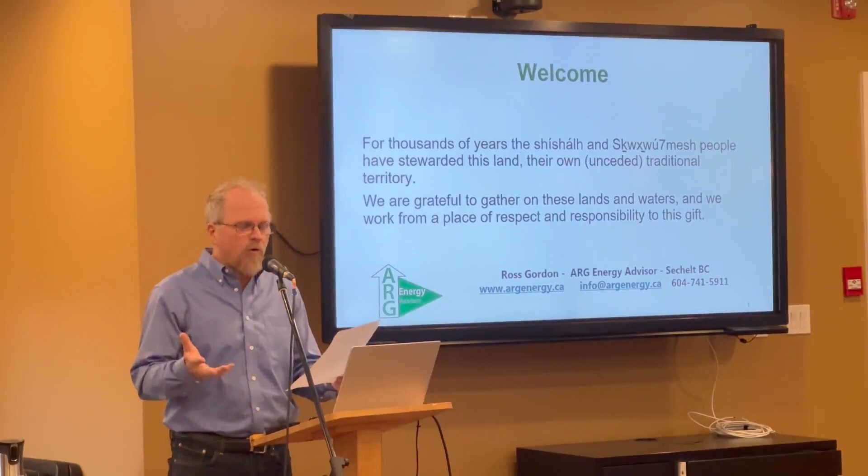Then we've got Jerry Pajot, and he is an expert on home energy efficiency and a board member of the Sunshine Coast Community Solar Energy Association. So another great resource. And finally, Liam Bonsar, who was the installer for our solar panels. He is the owner and master and Red Seal electrician with Newbon Canada, and he's going to finish off.

So we're going to cover a wide range of issues on what you can do from an energy perspective, how you can evaluate what to do first, what the steps are to be taken, and then a little bit more roll up your sleeves - how do we actually get this done? What does it look like when it's into your home? So I'm going to pass it over now to Dr. Ross Gordon. Thank you very much.

Of course, it's important to just take a moment to appreciate the opportunity we have to be here on this land.

Good evening. I'm really excited to contribute to this climate action series. I live in Sechelt, and I work on the coast as a Natural Resources Canada licensed energy advisor, working with residential homes. In a parallel universe, I have academic credentials in environmental anthropology, and I've taught courses at UBCO like political ecology, living in the Anthropocene, culture and nature, and these sorts of things.

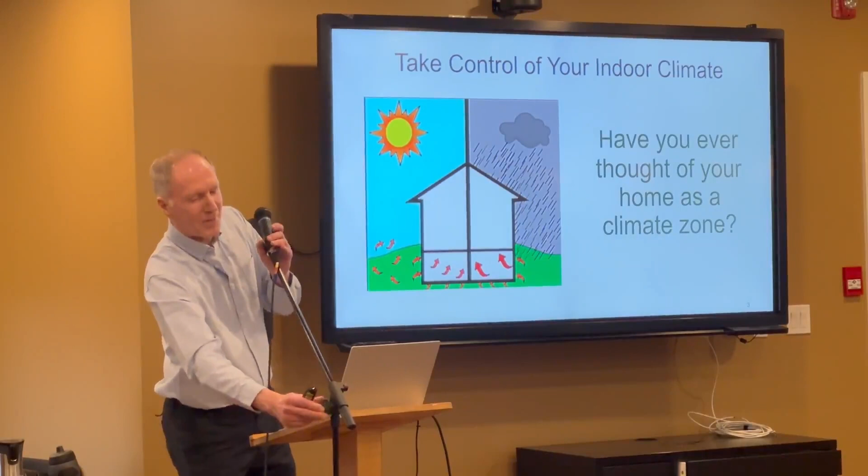So I'm going to run through, it's about 12 or 13 minutes, a bit of a talk, and then there's lots of time for questions, because I'd like to keep the flow happening, and then we'll come back. So if you just hold your questions to the end, happy to engage.

So homes are being made much more airtight for energy efficiency, and as mentioned, more than ever, our homes are sanctuaries from changing climate outside.

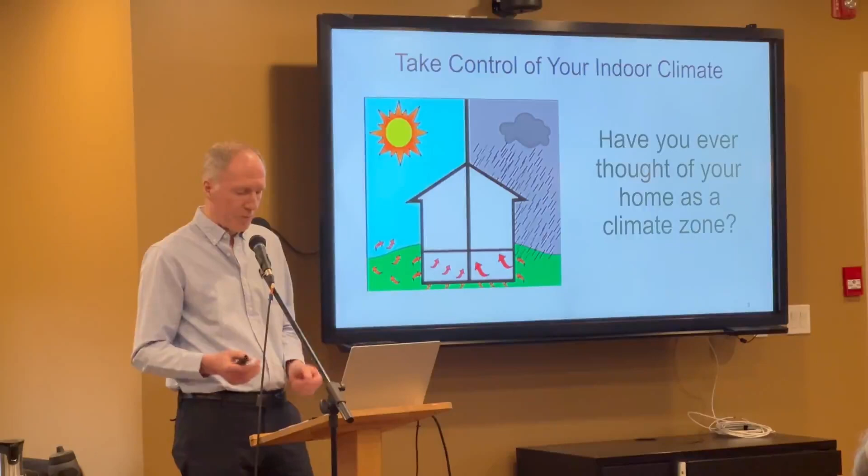Let's start off by thinking about the distinction between how we feel in our homes and how we feel about our home. How do we feel in our home relates to the building technologies. This is a really important distinction, because when you're trying to make decisions about upgrading, there are so many different pieces to those decisions, and I think it's really helpful to distinguish between how we feel about the home and how we feel in it.

We'll drill into this a little bit more as we go along, because this really relates to experiences, and everybody has some different ideas about that. So just for fun, if you share a home with someone who has different ideas than you do about what home comfort means, raise your hand please.

You're bad. Now, please, I did anticipate that. Please raise your hand if you kept it down last time because you did not want to start a fight over home comfort beliefs. So I think it makes the point.

There's two different sets of ideas we need to think about. One is how we feel about it and how everybody else in the home feels about it, and how the home actually functions. So the point here isn't to start fights, but to help you isolate the technology questions from the experience questions for the purpose of planning.

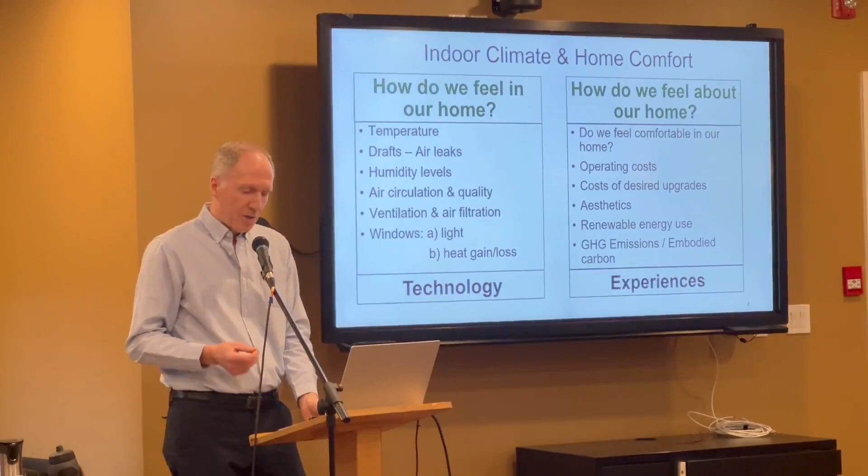That way we can start to not get overwhelmed and start to make a plan to choose the technologies to improve the energy efficiency of your home, save money, and improve home comfort.

The energy plan for a new or existing home is based on building an energy model of the home's exterior envelope, the mechanical equipment for heating and cooling, and ventilation. This is actually what I do as an energy advisor, is break all those things apart. So let's start with some of the basics of energy modeling.

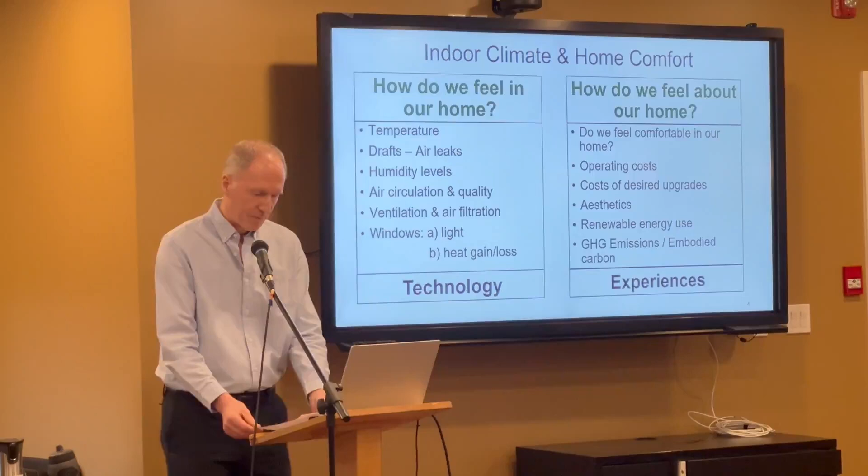So just a little bit of physics, we'll keep it light. When we start to model a home, we're evaluating all the components of the home associated with energy use and flow. Heat gain and heat loss is a lot more complicated in a home than most people realize, because there are three different mechanisms of heat flow in buildings, always in play in many different ways. They are conduction or heat transfer, convection or movement of air, and radiation of heat from the sun or a mechanical heat source.

In energy modeling and planning, we must isolate the technological processes from our experiences of them. So just for fun, reach down to maybe the little bar on your chair and feel the metal, and just feel how warm or cold that is. Now take the same hand, if you don't mind, and just reach down and touch the wood on the floor.

What's the difference in temperature? Did one feel colder than the other? The floor's warmer. Is the floor really warmer? Or do we feel differently because we don't feel temperature? We feel change in temperature.

So the metal conducts the heat away from our body very quickly, because metal conducts heat faster than the wood does. So there actually isn't a real difference, it's simple but it's complicated because we think of feeling temperature, but we're actually feeling temperature change when we notice temperature.

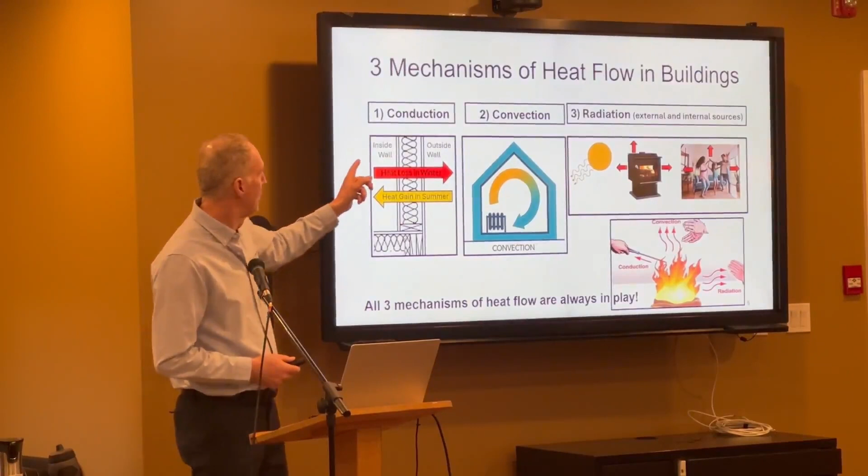Okay, so that's basically the hard physics lecture for tonight. But just remember those three: conduction, convection, radiation. All of those three elements are in play in every house, and every component of the house envelope, the walls, the ceilings, the floors, these things are going on to some degree or another with most of the different components. That's why it's important to think of a house as a system, because there are many different components that interact and are doing different things at different times.

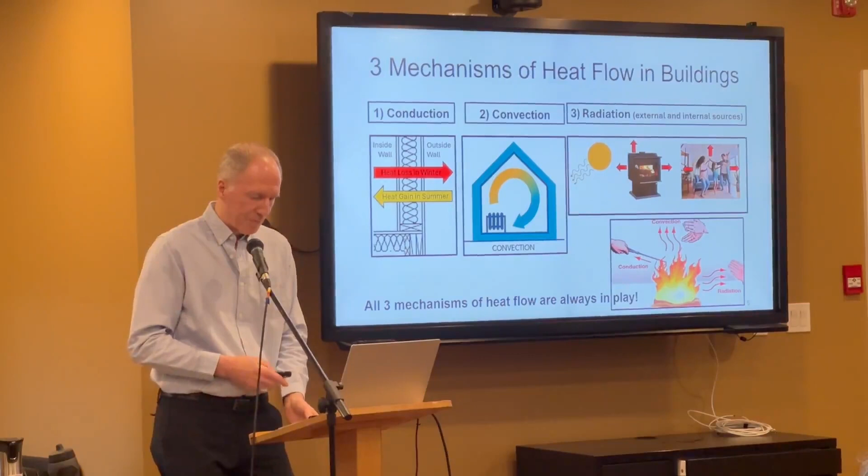So for heat conduction alone, each element of your house performs differently. When I actually do an energy evaluation, I'm estimating the current total heat gain and loss performance of each house element and interactions with other elements. Then we can start to identify the potential performance of possible upgrades.

There are technology change projections. These projections help produce upgrade estimates. The idea being, if we figure out what each element is doing in terms of heat gain or heat loss, depending on the season, and we think about changing one thing, we can start to understand how it's affecting other things.

It's a system. A lot of times people come to me and say, I want to get this, or I want to do that. And my first step is always to say, okay, let's get a plan here and think about what the priorities are and how each change is going to affect other changes. That's why the planning is important.

So the goal is to be able to compare the technology performance upgrades then with the home comfort benefits and cost estimates to make a plan. So breaking out the technologies and then thinking about how you want to feel in your home helps us make good decisions.

So indoor climate control goes beyond home comfort too. It's also a health issue. Many of us spend up to 18 hours a day in our homes, and as we make our homes more energy efficient, the interior living spaces become more discrete and unique to the home's location, structure, and mechanical systems.

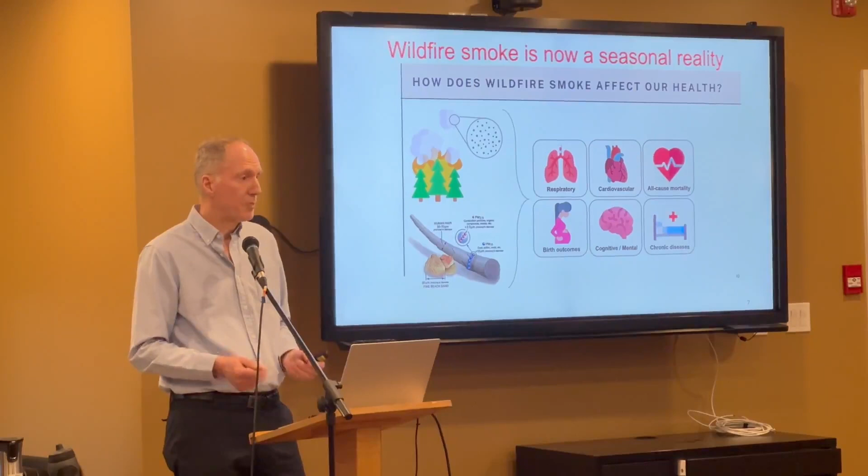So why are modern homes indoor climate zones now? As I mentioned, this is really a relatively recent change. When people heated with open fireplaces or coal furnaces, homes were drafty buildings with air leaks everywhere. Combustion heat warmed up the airspace near a flame, but sent most of the heat up the chimney.

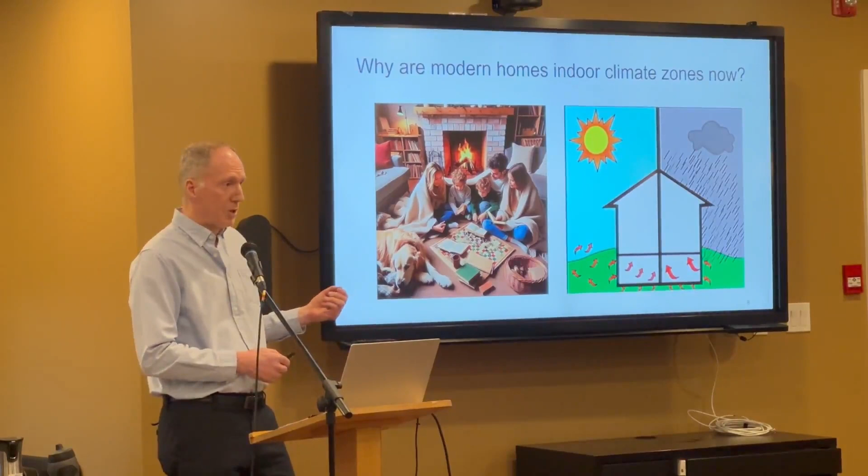Replacement cold air entered through cracks and holes in the building. This is what's called an exhaust-only ventilation system, and not very efficient, given the amount of wasted heat up the chimney, and not very comfortable near the walls where cold air is entering. So for cooling, in that system, you just open the windows, which doesn't always work now.

A more recent house design uses just kitchen and bathroom fans for ventilation. So in many of our houses, the only exhaust of air out of the house is when you actually physically turn a fan on, meaning a kitchen or bathroom fan.

So that's still an exhaust-only system, because the weakness of it is that in heating season, doing that is sending warm air out of the house and still drawing cold air replacement to come in through the cracks. This exhaust-only air movement creates what's called negative pressure in the home, drawing other air in from outside. So exhaust-only systems also assume a clean outside air supply.

The exhaust also may not remove all the fuel-burning residues, particulates, and gases that are made in the home from cooking or coming off other substances.

So over the years, as gas or electric furnaces and baseboard heating replaced coal and wood devices for home space heating, smaller percentages of unused heat were wasted, less air was drawn into the home, reducing drafts and improving air distribution. Our expectations of home comfort have come up as well.

So the house envelope is an important term you'll hear a lot tonight. Basically that's the defined separation between the indoor and outdoor climate, all the components of the home that form those barriers. So ceilings, walls, foundations, etc.

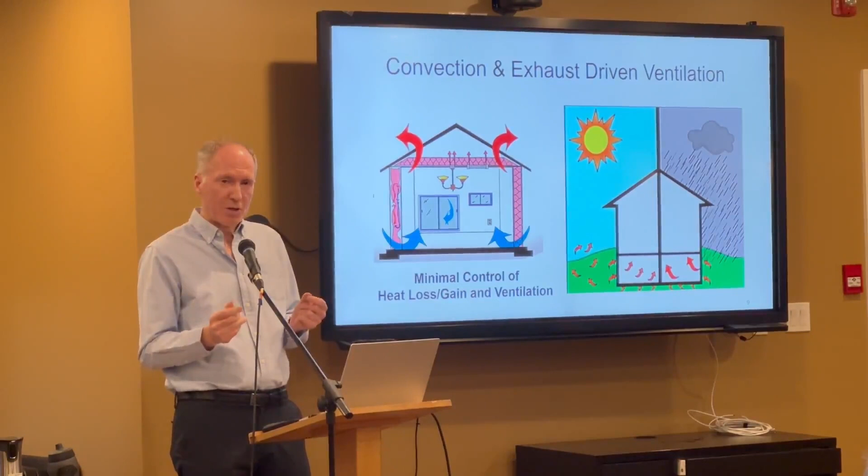When you're building a house, we're going to hear from an expert builder on making energy efficient homes, and I'm sure Brad's going to be talking to you about the seams of the house, how you stitch the windows to the walls and the roof to the walls, all these elements. This is often where the air leaks happen, and we'll talk more about that. So good connections are critical to resist the incoming air.

Now, another important idea I want to present tonight, because it tends to be a little confusing for people not familiar with it. Today, by building code in BC, and it's a recent change, the house envelope in new build homes is required to include a balanced mechanical ventilation system, often known as an HRV or ERV, heat recovery ventilator or energy recovery ventilator.

What this is, is a box with a lot of little metal tubes that cross over each other, and there's 4 pipes. One pipe draws air in from outside with a fan that doesn't use much electricity, pushes it through tiny metal tubes—metal conducts, as we talked about earlier—and then moves it into the house. The outgoing air, which is warm in heating season, crosses the path of the incoming air, so you get about a 75% recovery rate with the air change system.

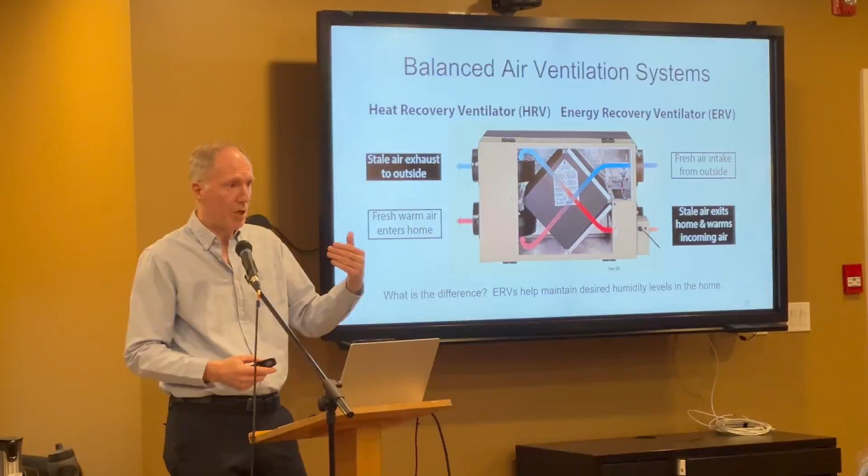So you get fresh air in the house and stale air being exhausted all the time on a steady state. This is where new homes are required to have this, and it changes from an exhaust-only system to an actual managed ventilation system, because it's ongoing. The key difference between the terms ERV and HRV is that ERVs adjust for humidity as well, to help balance that out on the way in and out.

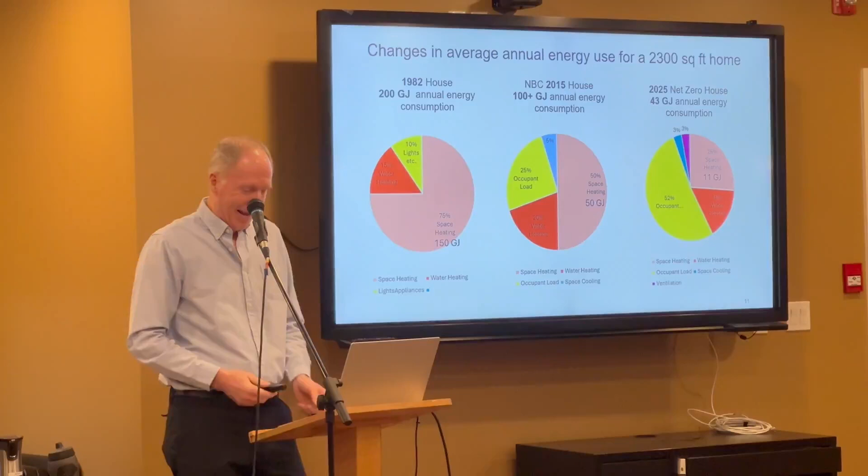Modern homes use a lot less energy for space heating by using more efficient heating systems such as heat pumps. In contrast, the occupant load has now become a much higher concentration of the percentage of energy used—think of all the devices we have now compared to 40 years ago. But the focus here is just to show that heat loss decreases with more energy efficient construction methods, and that reduces random airflow through the envelope.

Air leak testing—I'm going to speak to a little bit here, and I think Brad's going to pick up on it in a few minutes as well.

When I do a home evaluation, whether it's for a new home to test it or for a home being evaluated for efficiency, I do something called an air tightness test, where I put a fan on the door and it draws air out of the house, speeding up the depressurization process to simulate a 30-kilometer wind hitting the house from every direction.

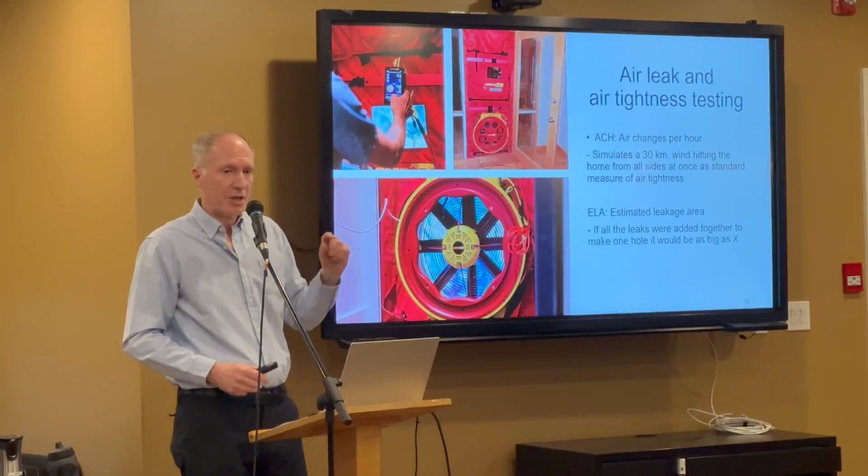This is a standardized testing system nationwide, and homes are rated to a certain amount of air changes per hour, which is basically the speed of replacement as air is drawn out of the house, and also the estimated leakage area—meaning if you take all the cracks and holes in the house and put them into one thing, is it a basketball, a yoga ball, or a baseball? Those are two terms that you'll see.

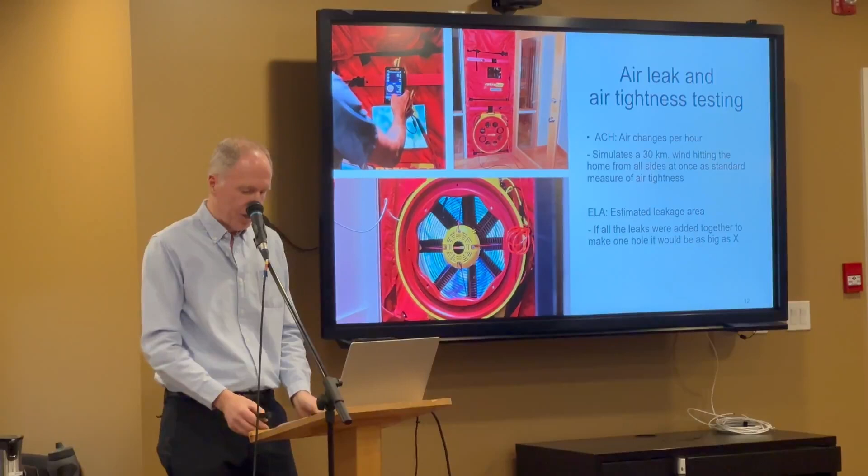There's a standard grade. The actual internal air volume of the house has to be calculated as well, to factor in air temperature differences inside and out. There's a few other factors that go in.

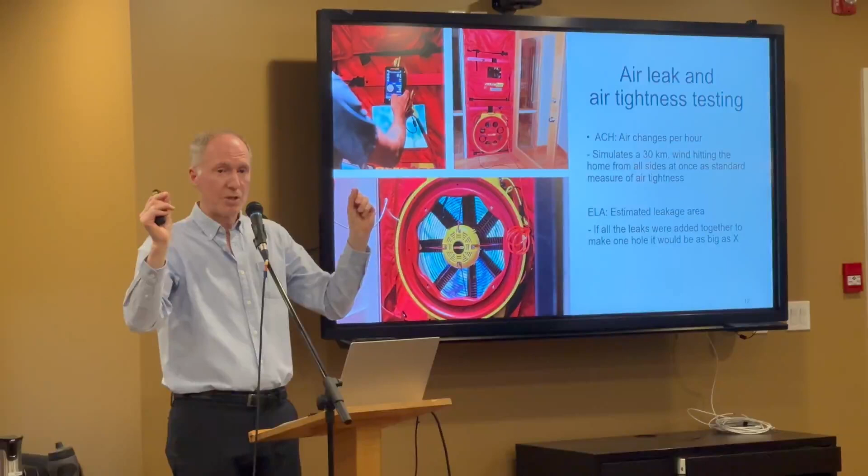So again, this is part of the idea of a house as a system, because now we're measuring the effectiveness of all the different elements of the house envelope combined, and also how well they've been stitched together—how well the actual construction process went, and how many little gaps were left behind through construction techniques.

Okay, so we control our indoor climate by making decisions about the system components we choose, how we use them, and how each component affects other components. For example, if we increase insulation levels or fix air leaks, then we can buy a smaller heat pump that will reduce energy costs and be more efficient. Everything's interconnected. So once we see that a home is a system, the plan allows us to anticipate outcomes when we make changes to the system.

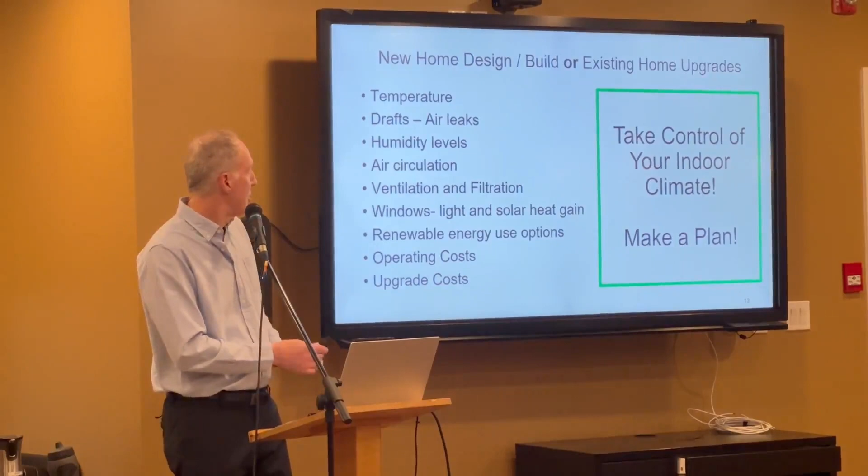When I work as an energy advisor, I evaluate existing homes to determine current energy model system components and then provide planning options for different combinations. This is the path to make good decisions to design and control the home's indoor climate. So here I'm stressing the technology aspects, to come back to the first slide, and then pairing that with what your idea of home comfort is and what your goals are, and then you can start to put those pieces together.

I also work with new home builders to design homes right from the plans. We build an energy model from the plans and the projections of what kind of mechanical systems are going to go in to meet current building codes. In BC, there's something called STEP code, a standardized level that's gradually being advanced every few years, requiring houses to be built to a certain degree of energy efficiency. So that has to start right at the design stage to achieve.

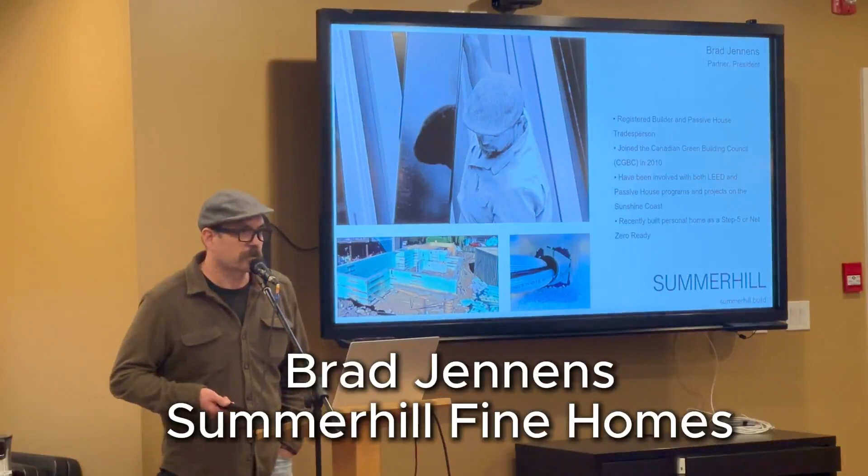Thanks, Ross, for leading us here, and thanks, Dave, for inviting me to the panel. For Dave's introduction, I'm a builder here on the Sunshine Coast. I grew up on the coast and became a residential builder here in the early 90s, so have seen a lot of changes in our industry since then.

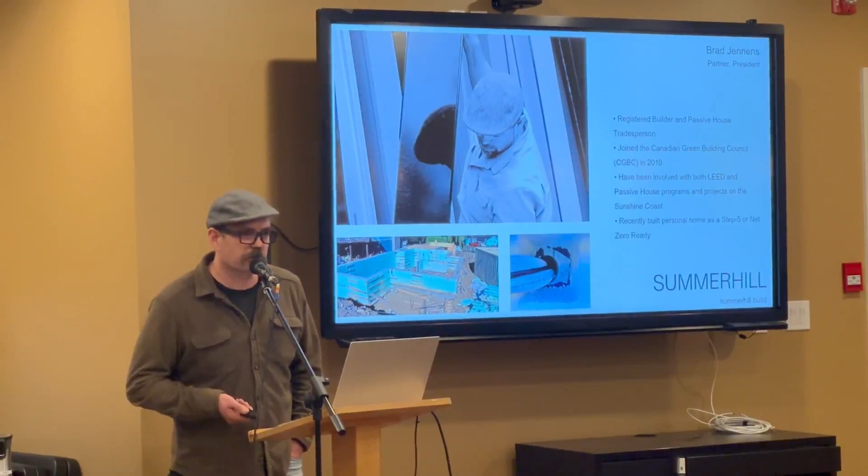In 2010, after taking a hiatus from building and being away on a sailing trip, I came back and got back to work and wanted to lean into the green building that was going on. So I joined the Canadian Green Building Council, and since then I've been part of some LEED building programs and passive house projects here on the Sunshine Coast, and most recently built my own Step Code 5 house, which turned out to be a really good learning opportunity as a builder. I'm going to share that with you as our case study, and hopefully you can take something out of it. If you're not building a new house, it doesn't really matter, there's probably things that might be meaningful for you still.

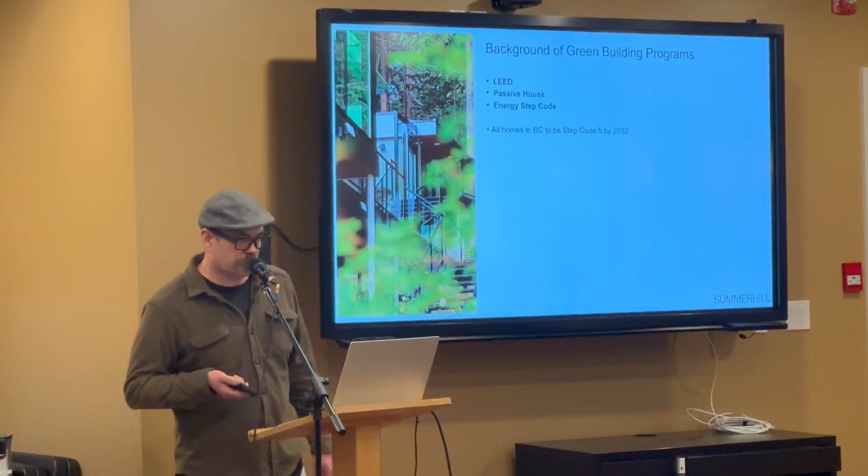Since being part of the Canadian Green Building Council, we completed a house just up here on the bluff to a LEED standard, and LEED is just a green rating program, it's a very integrated program, and I quite like it. It considers the building of the house, and considers its linkages to transportation, it's a very multifaceted rating program that was fairly popular, but kind of a little bit cumbersome too, so it didn't really catch on in residential building.

Alongside that was Passive House, and Passive House has been a big contributor to the education and developing the technologies in the industry. It's a rating program based out of Germany that gets the house to a very, very low energy use, and it's basically set the standard as far as energy efficiency in homes and new homes.

Since then, the government saw what was going on with passive houses, and saw that there was an opportunity to make our housing stock much better, much more energy efficient. They took on climate commitments internationally, and said if we're going to make these commitments, we're going to have to make our buildings better, and that's going to mean getting to passive house standards, setting the target for 2032. Approaching it, not just dumping it on us as builders, they said we'll take steps to get there, with target points to make improvements to the code. By 2032, all houses are meant to be net zero ready, which is what the step code goal is.

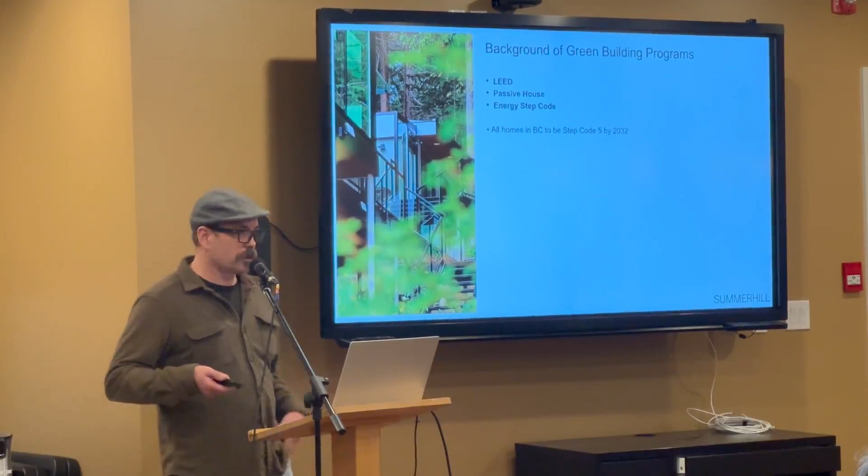So basically, the envelope of the house is going to be very robust, and the energy use is going to be very low. And with the addition of some on-site renewables, the idea is that the houses can be net zero, and so in other words, not need any additional electricity.

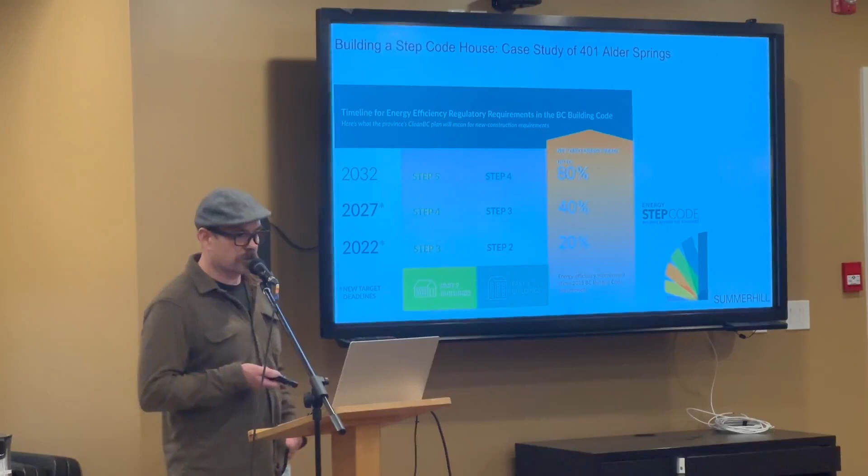Speaking to the step code targets, by 2022, which is what we're building to now, we're 20% more efficient than the baseline house, which is the 2018 BC Building Code standard, and by 2027 we get 40% better, and as mentioned, 80% better than the 2018 baseline house by 2032.

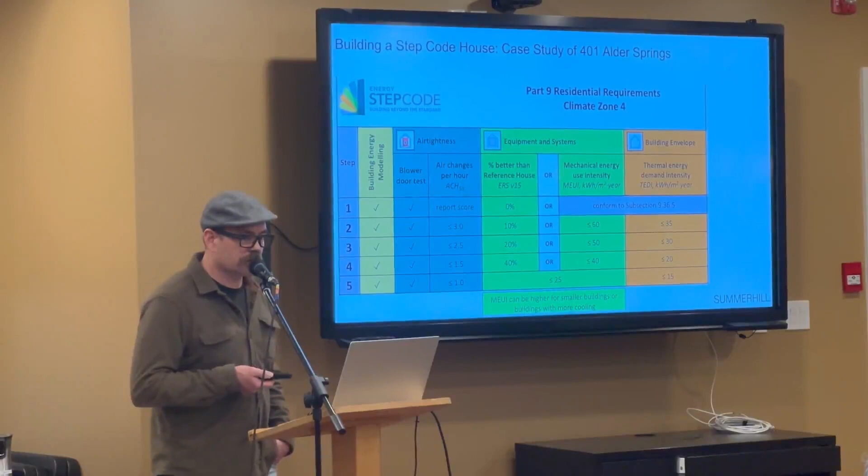Ross talked about this a little bit, but the house as a system, the two major systems in the house that create the energy efficiency are the thermal envelope and the mechanical system. Both of these are by spec and in the design of the house.

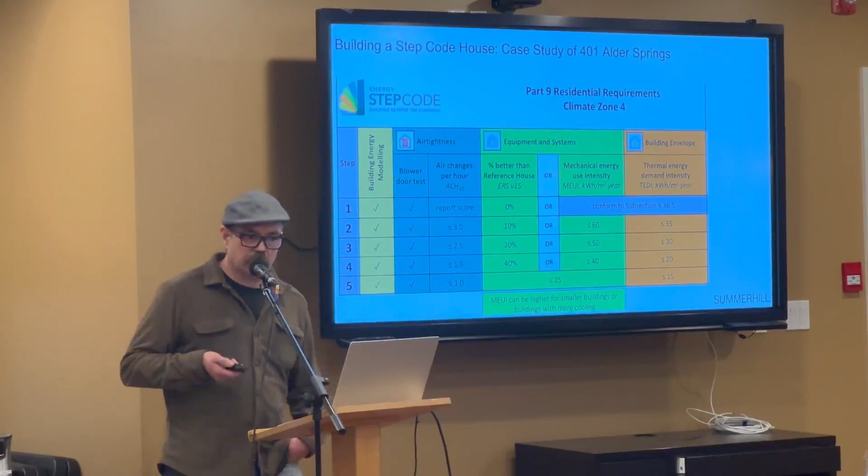So when you're working with your builder or your designer, you're also now working with an energy modeler to make sure those standards are met, and you're going to be able to pass the BC step code where it's at that stage. The variable in that is the air tightness.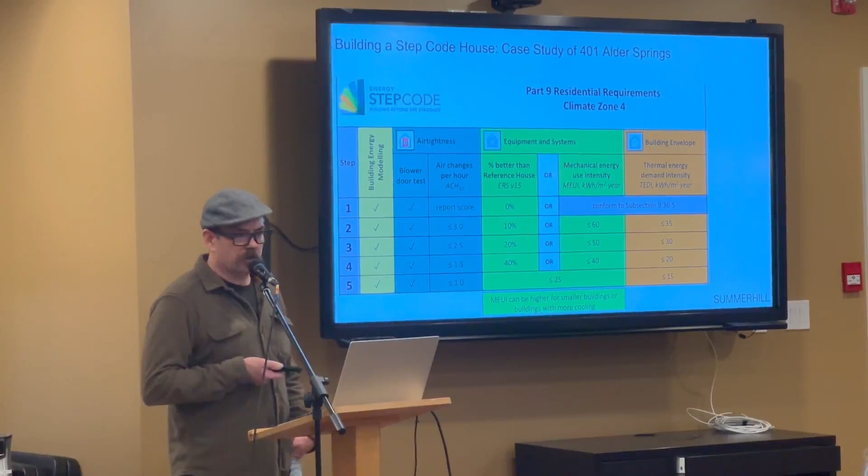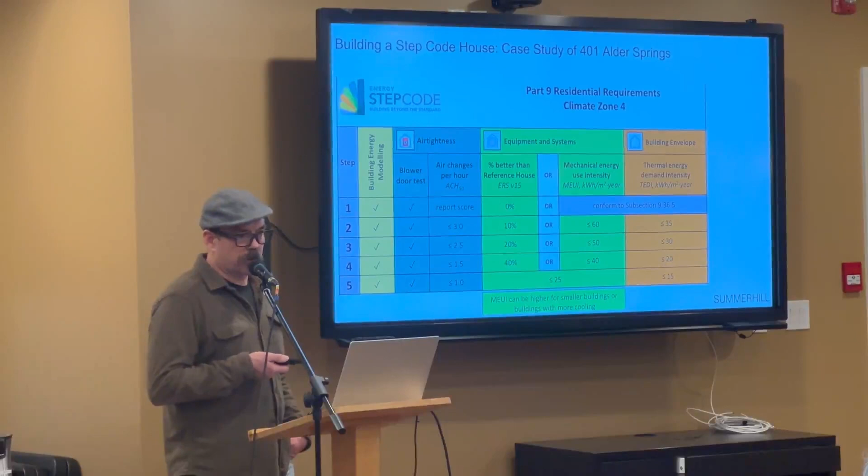When I first started building, there was really not much mention of air tightness. We heard about vapor barriers, but we didn't really hear anything about an air barrier. In the last 10 years, as builders, we've learned a lot about air barriers, how important they are, and how to create really good ones, and what a good one is.

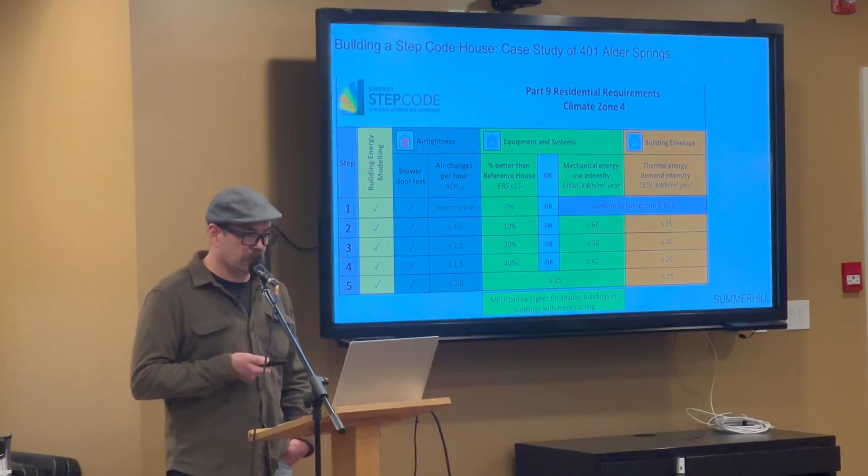So the Passive House standard for air barrier - you can see here the Step 5 standard is air changes per hour less than 1. The Passive House standard is 0.6, so it's even lower than the Step Code 5 house, but that's the direction it's going.

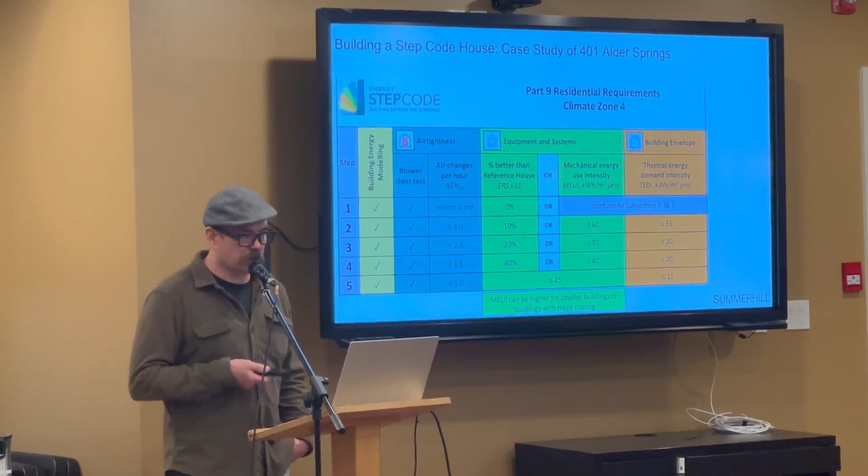And to make up for that tightness in the house and to get fresh air into the house, as Ross mentioned, we use mechanical ventilation, and that becomes a really important part of the house and part of the system.

So I designed it based on some Passive House wall assemblies and roof assemblies that I liked, and got to working with the energy modeler.

He got back to me, and I was pretty sure I was going to go for a Step Code 5 house. I got the modeling back, and he said no, it's not Step 5, it's Step 4. He said it's close, but it's not Step 5, and I was like, okay, that's not what I wanted, but how can we get to Step 5?

So it became a good learning opportunity for me, because what I realized is that with complicated shapes and stuff, that made it more complicated, and you had to work harder to get to the lower energy levels. So he made some suggestions - reducing some window sizes, improving some insulation values, and tightening up on the air tightness - and those made the difference.

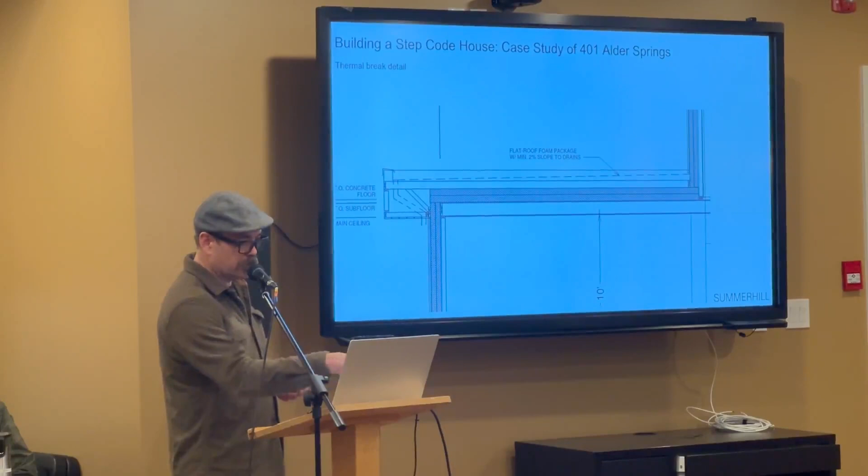Again, this is just another section photo of the house, pointing to the continuity of that air barrier, or of the thermal barrier here in this case.

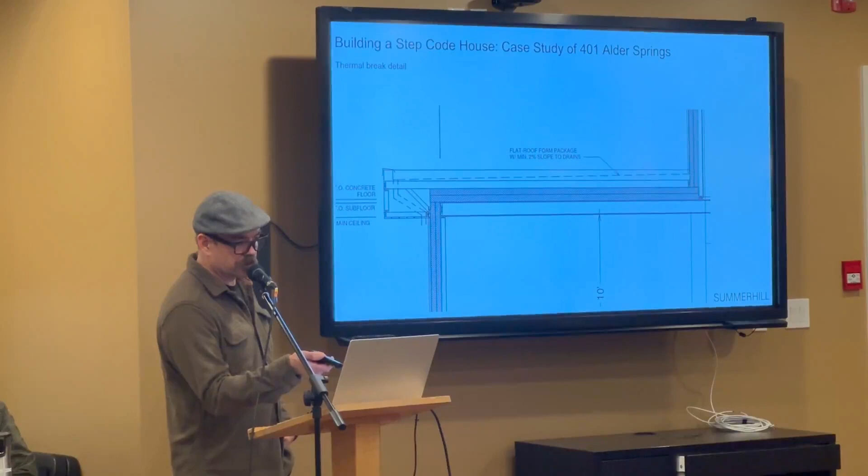But the other thing that we're doing as builders to improve energy efficiency is reduce the thermal bridging. Thermal bridging is where we have members of wood that are transferring heat through to the outside. If we can protect or make a separation between the framing members and the outside, that creates a thermal break, so less heat transfer.

So I don't know, is anybody familiar with air barriers here, or am I speaking Greek here?

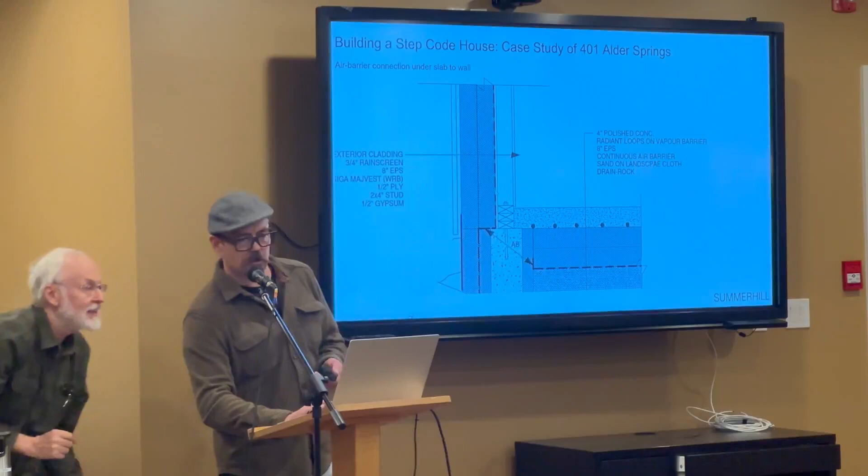Okay, Brad, if you could point to and show us what you're talking about on the diagram? Sorry, thank you. Your finger works—oh, finger. Okay, got it. Yeah, okay, I'm doing this. I'm a builder, not a presenter.

But this dotted line here, in this case, is representing the air barrier, and this would be the air barrier connection between under the slab and the wall here. So let's just get on to the next photo.

So the following are just some photos of the building of the house, and you can see some of the effort that went into the insulation, and how we really tried to make the house as energy efficient as possible.

Really, focusing on the envelope is the mantra we get in Passive House and in our building technology, because if we focus on the envelope, the other parts, the mechanical parts of the house, can always get replaced—they have a lifespan, so they do get replaced later. But the envelope of the house is what may last 100 years, so we want to make that as robust as possible.

So I used ICF forms, which is insulated concrete forms. It's like building Lego, basically. They're kind of fun to use, they're light, and they make a great warm, dry basement. You've probably seen these around, and that's what I used on my place here.

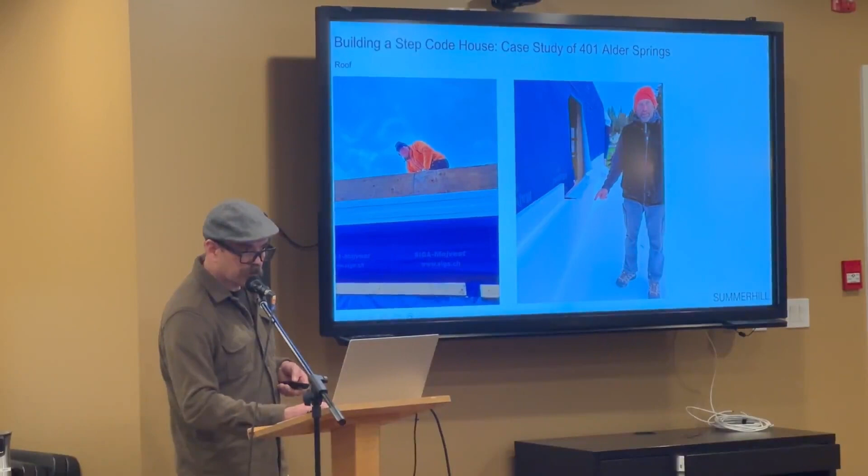So if you're building an energy efficient house, one of the important things to remember is to get your friends to help you, because it takes a lot of labor.

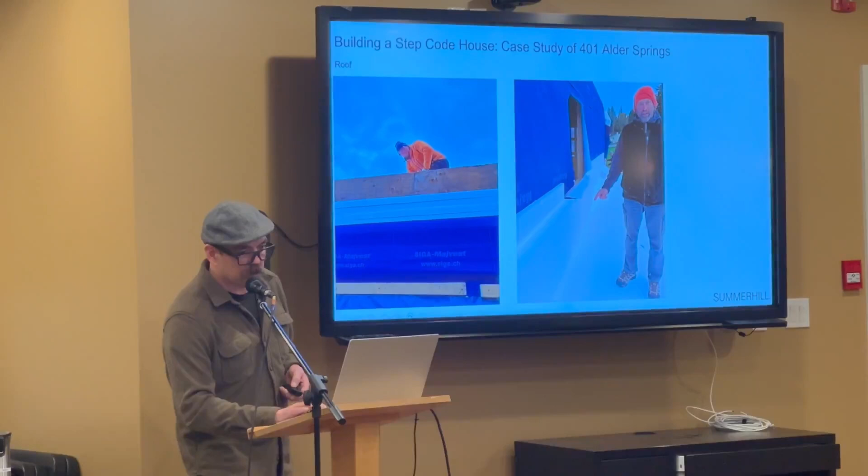This is again a picture of the roof meeting the wall, basically showing the continuity of the insulation running up the outside over the roof and outside of the wall, and the fact that it's on the outside of the building eliminates that thermal bridging that's typical with more traditional construction methods.

Here we've got I guess 12 to 15 inches of foam on the roof, and the parapet sitting on top of that, creating our thermal break so the heat's not transferring through the framing and out. So all these are details we consider with super energy efficient housing.

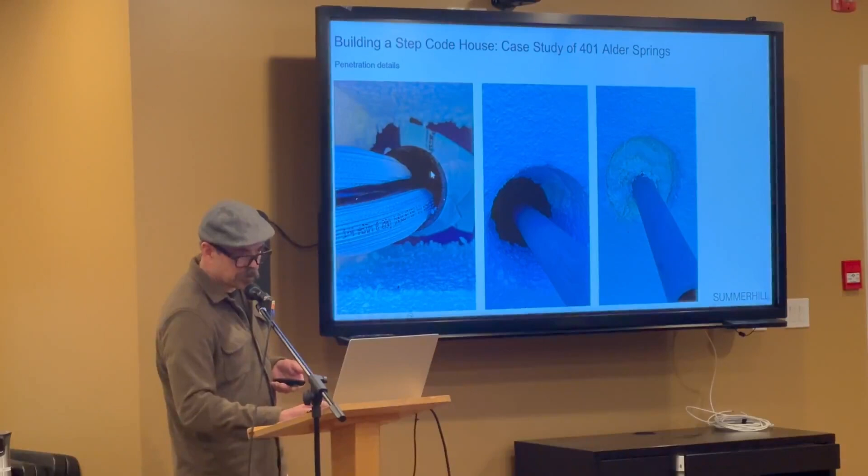So the last photo before we get to the little video I've got is just showing the penetrations in the thermal envelope here, and again just the level of detail you have to consider when building these super energy efficient houses. Here we've got the refrigerant lines coming into the heat pump head.

So making a clean avenue for them to go, and then we were able to tape the conduit to the air barrier and spray foam that to close it up, and probably caulk it as well, because this is probably going to leak a little bit of air, and we don't want that. We want to minimize that as much as possible.

Again, here we've got a penetration for a conduit that's going to accept the future solar we're hoping to put in, and again just detailing that to make sure it's sealed at the air barrier and insulated. That's again the level of detail we need to consider when building, and of course this comes at a cost.

So as we get towards step 5, we're trying to improve our methods and get more efficient and make it more the norm, I guess, so that we can do it more efficiently and not let the cost of it get too out of hand.

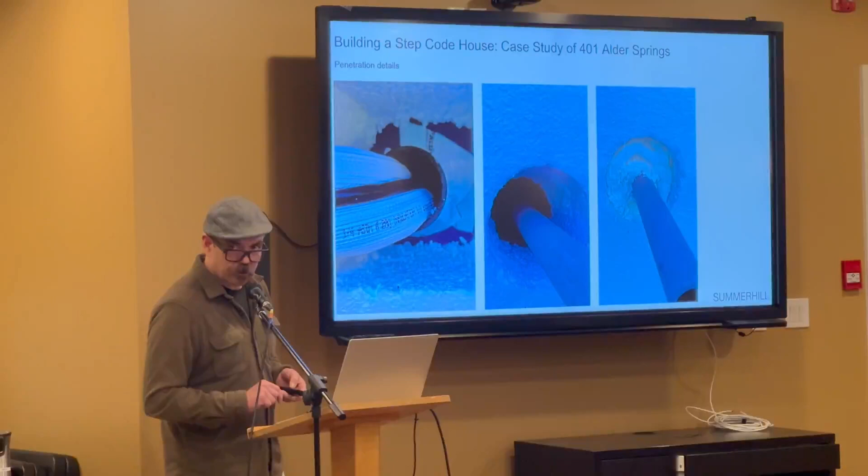So the sort of report card day on any build is the blower door test, and you see how airtight you've made the house. We did put a little video together of the mid-construction blower door test, which isn't mandatory in the step code, but it's really recommended, especially if you're trying to get your air tightness to levels under 1, or passive house levels, because it gives you an opportunity to make fixes if need be. So here's a little video that we made of our blower door test, and it gives you an idea of what that looks like.

And if I can just press play.

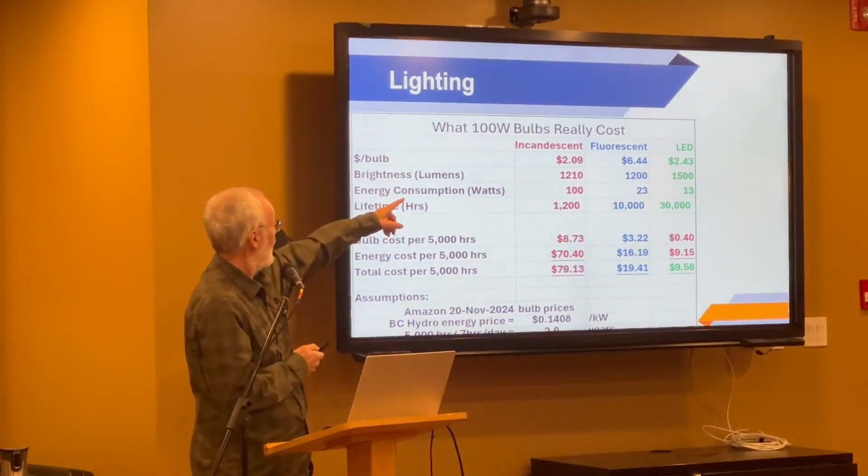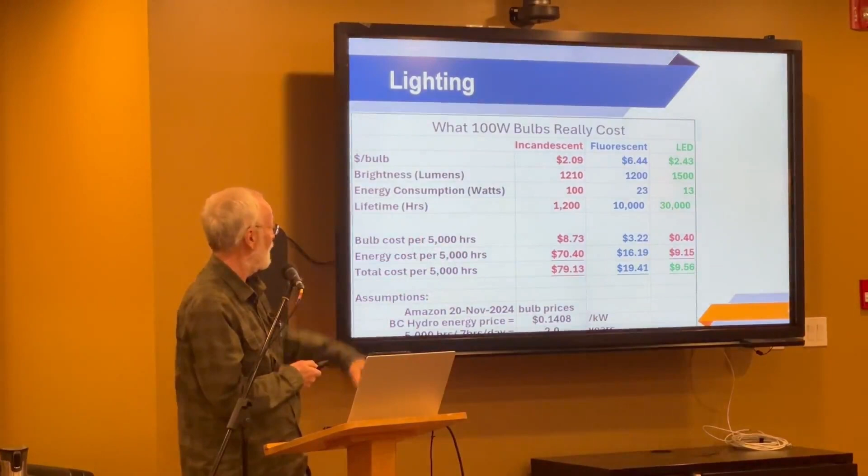The incandescent bulb is pretty cheap, but it hardly lasts any time, so the bulb cost is $8 per time period. The LED lasts way, way longer. This one was a really good long-lived one from Amazon, but if you go to Canadian Tire, they've got some that are half the price but only last 1,500 hours. You can look at the box, it tells you what it's rated for. It's 40 cents compared to the $8 for the same amount of time. So for that 5,000 hours, you'll spend $8 on the incandescents.

Energy costs, though, dwarf it. You're only using 13 watts for the LED, and it gives you the same amount of light as this 100 watt bulb. So you're using $70 worth of electricity compared to $9 - a factor of 8 or 9. Go out and replace your light bulbs.

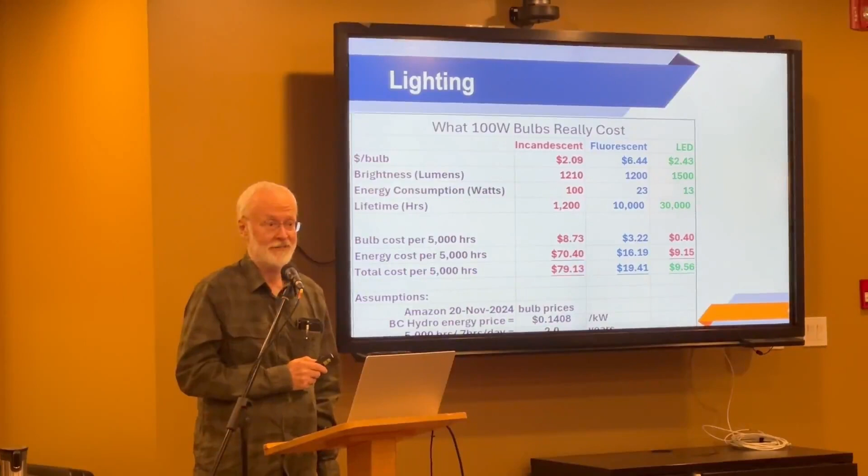Home heating and cooling is the next one. If you've got an oil furnace, don't wait to replace your unit. If you're using propane, I know a lot of people are using propane - again, major reason to change.

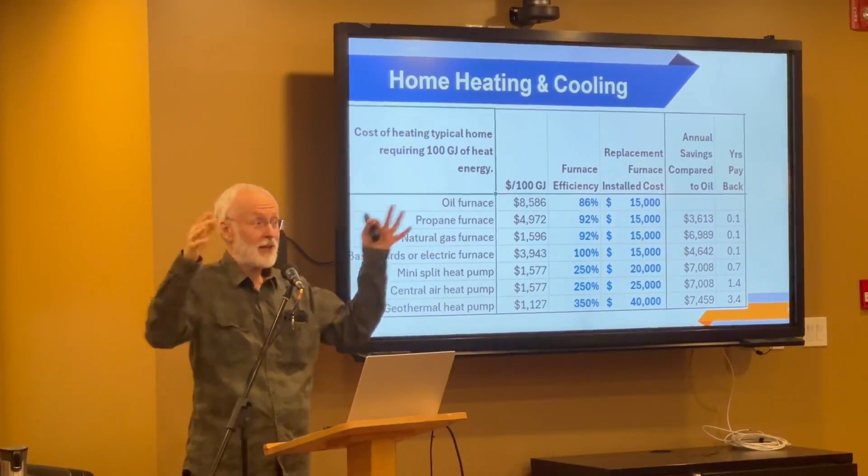This shows 100 gigajoules is a typical amount for a home. That's basically what BC Hydro says for the average home on the Lower Mainland. If you've got a house like mine, which is from 1974, it had an air exchange ratio - Ross tested it was around 4, not 0.56. So when the wind blows, you can see things flutter in my house. That's one of the things I'm working on, improving my envelope. But anyway, 100 is the average. An oil furnace costs you $8,000. Natural gas is the cheapest, but a heat pump is right in there.

So that's why if you care about the planet, and you've gotten to the point where your old gas furnace is 20, 25 years old, it's time to replace it. Please don't replace it in kind with something that's going to last another 25 years. You can replace it with a heat pump for approximately the same amount of money, and it has almost no greenhouse gas emissions. So please do that.

Central air is about the same, and geothermal costs a lot more to install because you have to have lines outside and so on, but it's still worth it. So if you look at the replacement cost, if you have an oil furnace and it's died, it'll cost you about $15,000 to put in a new oil furnace, or propane, or natural gas, or mini splits. They're maybe $20,000 because you're changing the system, so it's a little bit more expensive.

However, if you look at the far side, what's your payback? Going from an oil furnace, the very worst case is a 3-year payback with the geothermal system, by switching to the new one. And you can see switching to a heat pump, less than a year. Okay, so that's switching from an oil furnace.

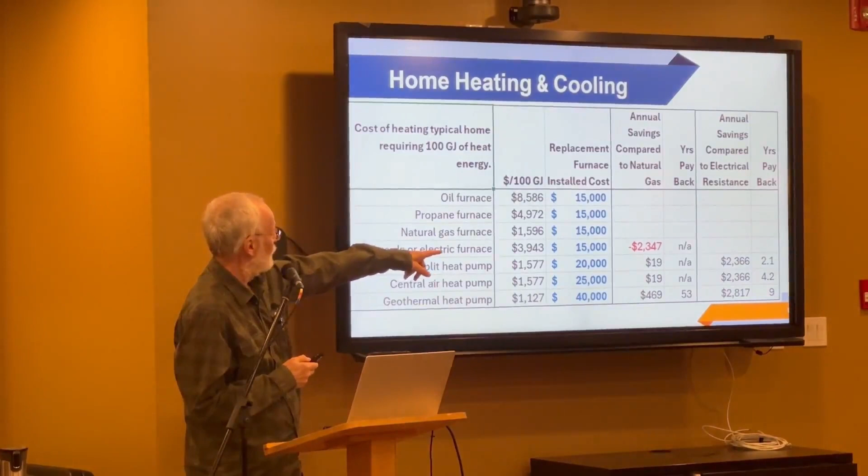So they're very, very efficient, use much less electricity, but then the payback going to the mini split is 2 years, 4 years, and so on - probably even less because there are incentives. If you qualify for incentives and do it with their interest-free loan, and put that $25,000 into some sort of investment - don't do Bitcoin though - but if you put it into even a GIC at 3-4%, then that payback is even better.

So that's what I wanted to show. We will go into how to calculate this stuff later, but that's coming next week. Overall, please - heat pumps seem to be the answer at the moment. There's probably other technology coming, but right now, no question, it's the way to go.

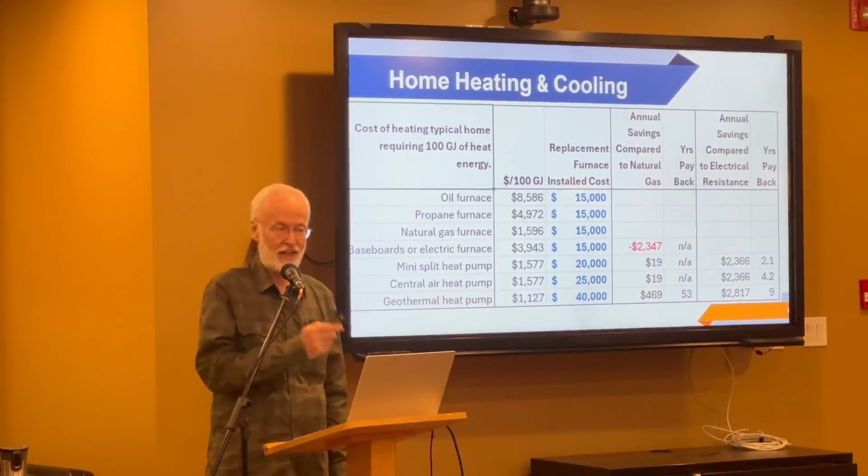Okay, and as a Tesla owner, I have to say, I have a hard time with that. I bought it before I knew Elon was going to go into politics. But anyway, it's a great car, and there are other great cars as well.

The important thing with them is, again, dramatically reduce your greenhouse gas emissions. Range is not an issue anymore - they all go 300-400 kilometers. If you get the Teslas, they're up to 500 or even more, way more than my bladder can take. So you just stop when it's time for your bladder, plug in, go get yourself a cup of tea or something, come back 15 minutes later and it's ready to go another 100 kilometers.

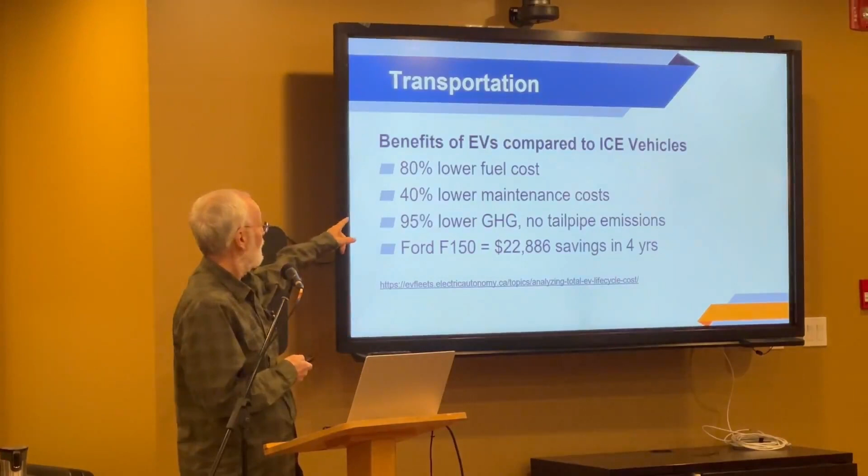Way lower maintenance cost. EVs have about 50 moving parts as opposed to 2,000 for ICE vehicles, so no more oil changes and all that stuff. Also 95% lower greenhouse gases here because we have hydro.

For example, a Ford F-150 will save you $22,000 over 4 years just comparing gas to the electrical bill if you plug it in at home. So that's all I'll say about EVs, but please make your next car at the very least a hybrid, but even better an EV. A hybrid is just a really efficient gas engine—you still have all the maintenance and so on because it's still a gas and internal combustion engine.

Okay, building envelope. We've had a major lesson—I wasn't sure if I was going first or last, but I'll refresh your memory. Insulation, vapor barrier, and I've learned a new thing: air barrier. In my house, the air barrier is the interior vapor barrier, and in my 1974 house, that's a strip of tar paper hooked up to one inch of insulation stapled to each 2x4. So it's kind of leaky, and everybody else with a 1974 or older house, it's probably just that bad.

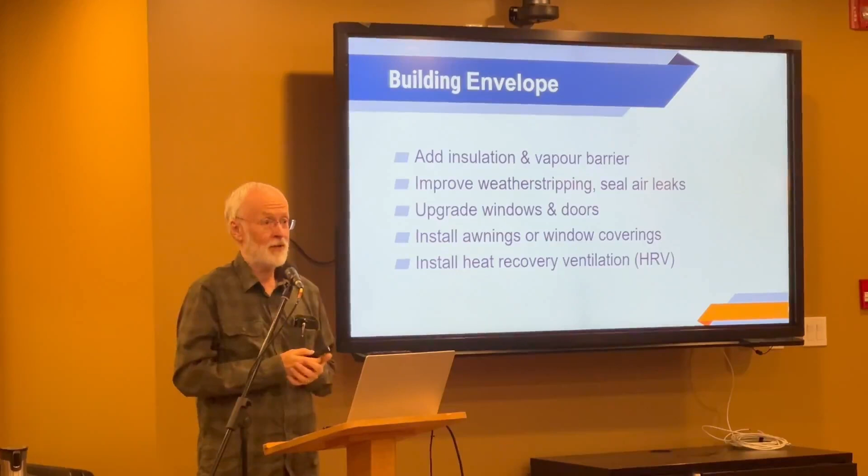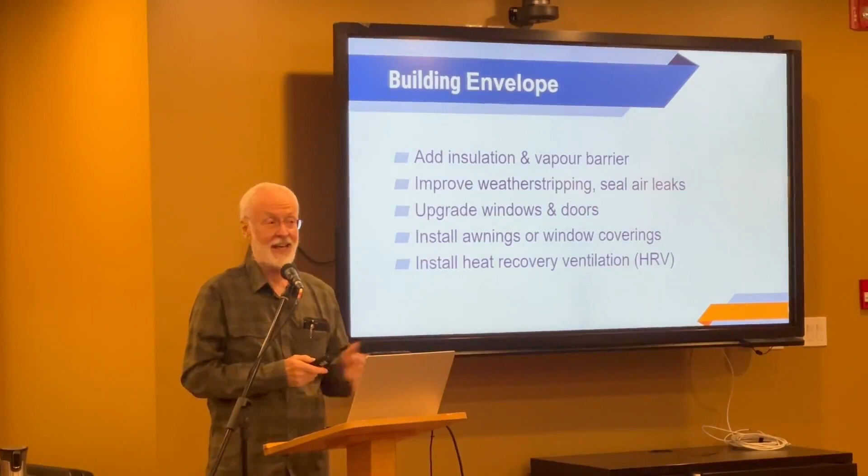If you have an older house like I do, put in an HRV, because it dramatically improves the comfort of the house. It still blows in my house when it's windy, but now my air is fresh and I don't have a constant inflow of air because it's neutral—my house isn't under negative pressure anymore. So my wife has let me lower the temperature to 72 now. I would like 68, but 72 is a big improvement over what was there before, because it was drafty.

I care about renewable energy as part of the Solar Energy Association—that's been my thing. I'm a chemical engineer and I've been super interested in solar energy since I graduated back in '78, and it's only gotten better. There's a great slide coming up showing how much solar energy cost has dropped, and it's definitely worth doing—absolutely worth doing. If you have a house that isn't too shaded, you will save money on it.

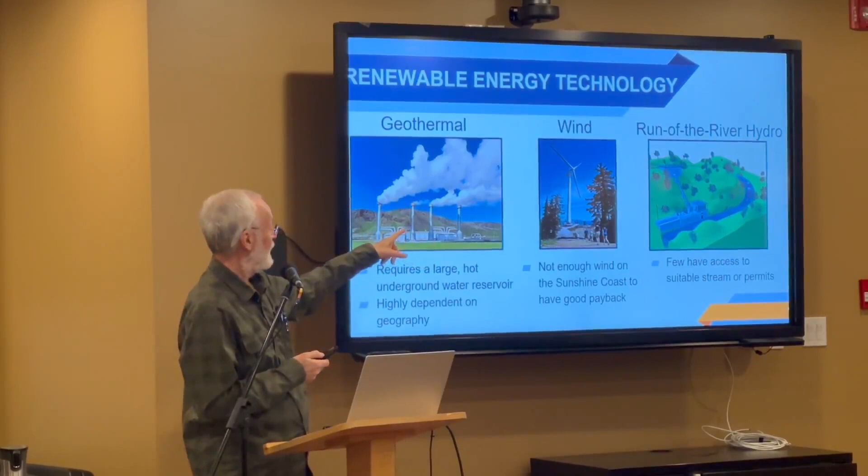Okay, wind. This is the unit sitting up on top of Grouse Mountain. If you go look at it, it's hardly ever turning, and it is in the very best location—the very top of the mountain, no trees around it and so on. We simply don't have enough wind here on a consistent basis. We get gusty days, but there's not enough wind generally.

So if you're thinking of how to make power, if you're in the middle of the Rockies, probably great—you know, Calgary has fantastic wind.

Which just leaves hydro. We have wonderful hydro reserves, but very few people have got a mountain stream going through their property. And even if they do, you have a really tough time getting a permit to harvest that energy. So again, for us, it's not an issue.

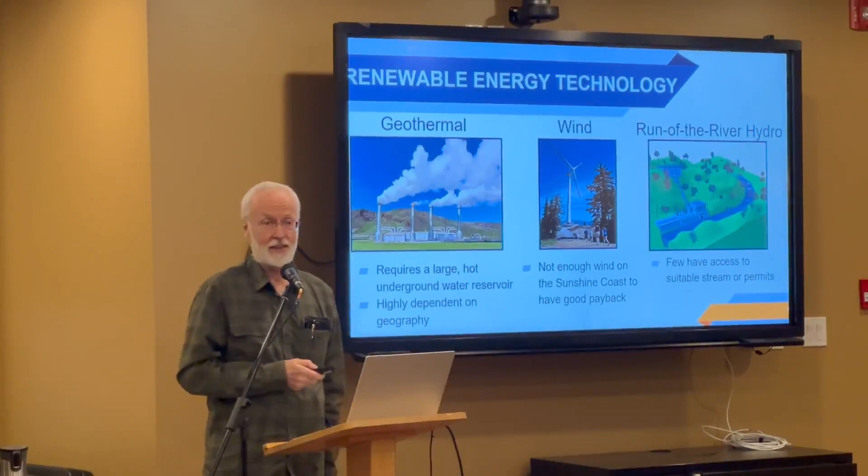I have one of those on my pool. I'm lucky to have a pool, I must say. From May until September, I keep that pool at 82 degrees Fahrenheit, which is about 28 Celsius - but my meter is Fahrenheit, I've got an old meter. 82 degrees Fahrenheit, super lovely. No energy whatsoever other than the pump going around like it would have anyway. So that's totally worth it.

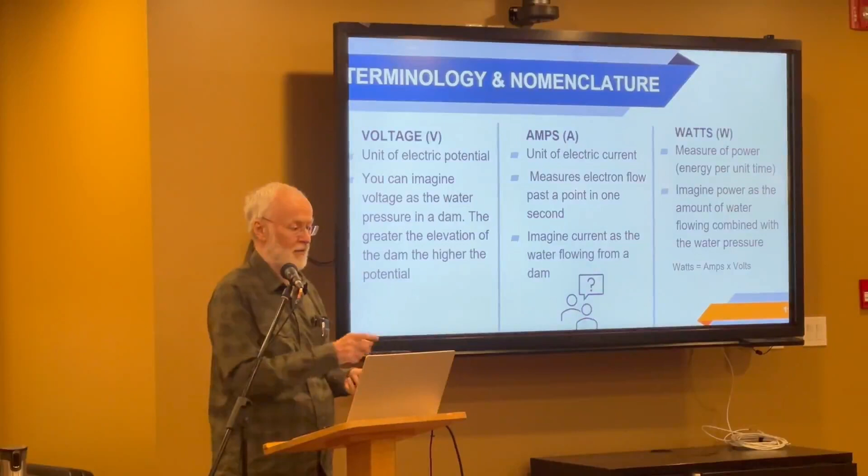Because 1 amp at 12 volts is not anywhere near as powerful as 1 amp at 120 volts. That one will fry you. The 12 volt one, you might feel a little tingle, but that's it.

Okay. Kilowatts - that's just 1,000 watts, and it's the rate of energy use.

In cars, we think of horsepower - it's 200 horsepower, or if it's a Tesla, 400 horsepower, whatever it is. That's what it's capable of. If you put it, you go. But what really matters is how long have you been using that power? So you might have a 200 horsepower car, but if it's sitting in the garage not going anywhere, you're not using any energy. You have the potential to use the energy, but you're not.

However, if you have it and you use it for an hour, now you have a kilowatt hour. So that's the thing BC Hydro charges you for, right? Your 14 cents per kilowatt hour on your bill - that's the consumption of 1 kilowatt times 14 cents per kilowatt hour.

So an LED light bulb might be 10 watts, which is 0.01 kilowatts. But if you run it for 6 hours, now it's 0.06 kilowatt hours.

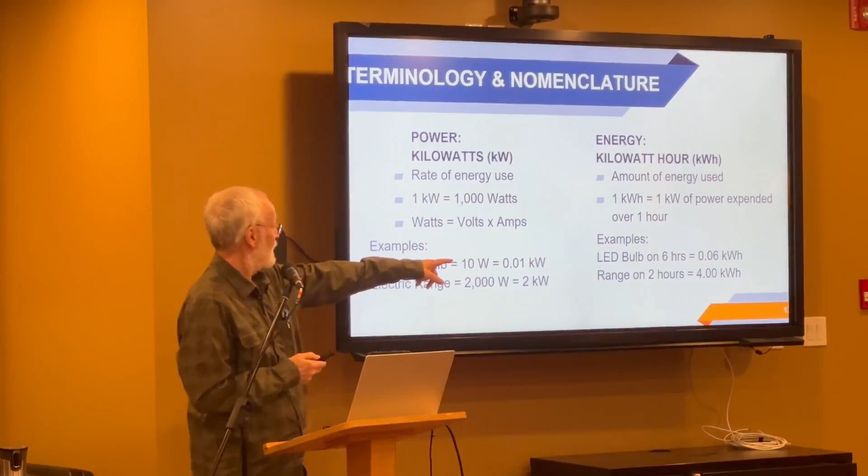Your electric range or your oven typically is about 2,000 watts, so that's 2 kilowatts. So if you have it on baking big potatoes or a roast for a couple of hours, you've just used 4 kilowatt hours times 14 cents equals - there's your bill. You do it all over 2 months, eventually your bill adds up.

In solar, you'll hear people talk about watts per square meter, and that's basically how much solar energy will land on a particular square meter, ideally on your roof. You want to measure that, and from that you can estimate how much your solar panels will do. You don't have to worry about that, but you may see it in a report that a person does on your solar panels.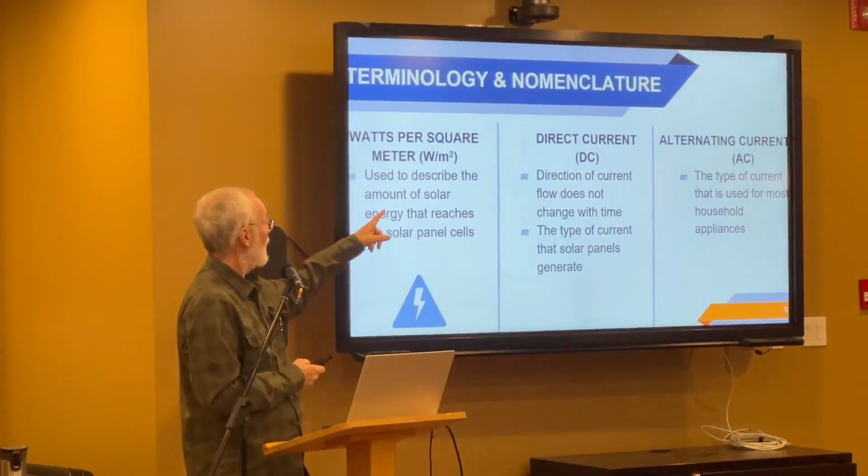And then the other thing is direct current and alternating current. Direct current is like your car battery, where you've got a positive and a negative, and the current always goes in that direction. Alternating current changes direction 60 times a second, going this way and then that way, back and forth. Still power, but a different form.

Okay, I'm stopping here because we're going on to more stuff. So are there any questions from any of us at this point?

Hi, can you hear me? Yes. So thank you, that was a great presentation. And thank you, Brad, as well, and everybody, it's all been great.

I'm just wondering, when you say your house is net zero on solar panels—I've looked into different options as well, and I was told solar here wasn't a great option because of cloud cover in the winter months. So you're still on the grid, I take it? I'm on the grid, taking advantage of BC Hydro net metering. You're correct, in the wintertime my solar panels make about 1/10 of the energy they gather compared to July.

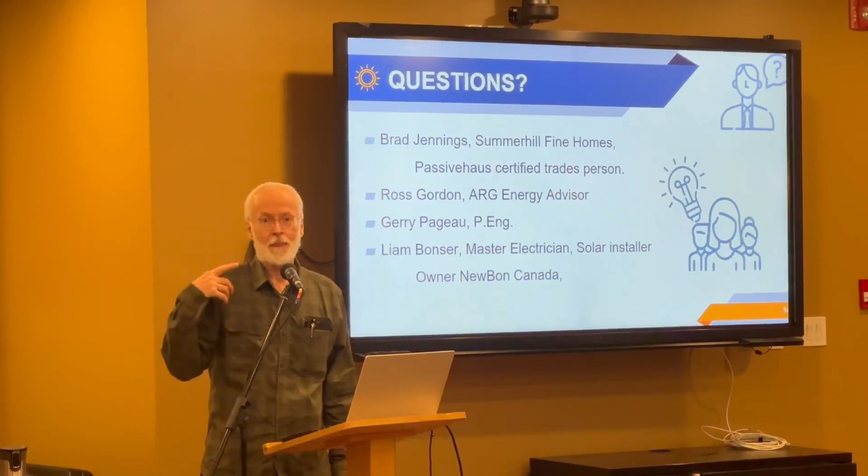I did. When I bought my Tesla, I put in one of those 110 volt plugs right next to it. This only gives you about 8 kilometers per hour of charge, but on the coast here I usually drive 30 or 40K at most during the day, so it easily recharges overnight. There are some incentives right now that make it so you can buy a faster charger, and I think I will take advantage of it since you get it almost for free. That will charge it up in maybe 3 hours instead of 8 or 12.

Gerry, those figures you were listing for the payback for replacing your heating system - what if there's nothing wrong with your heating system? Would the payback be worth it at all? If you had baseboard electric or a perfectly good natural gas heater, would it ever be worth it to switch to a heat pump?

I care about the environment, so yes. You get rid of the greenhouse gases, and you get rid of the chance of carbon dioxide, carbon monoxide, methane, and assorted gases in the house. As soon as you get rid of that, you can't have any carbon monoxide anymore - that's one of the possibilities of having a combustion source in your home. So I think it's worth it.

Certainly, if it's getting close to end of life, please do it. If it was just put in 2 years ago and it was a mistake, I understand, but... thank you, I'm showing my bias.

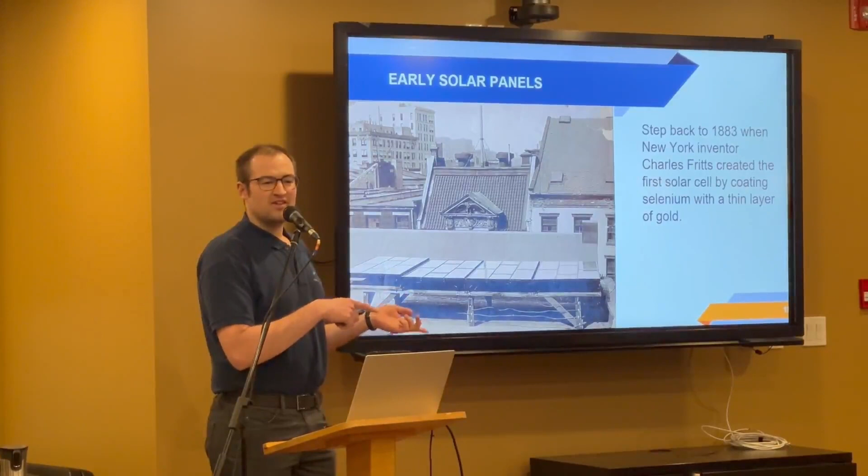The inventor of it was Charles Fritts. We don't have a ton of detail about it, and there seems to only be one picture of it. But what we do know is that the efficiency was about 1%, which is extremely low. But what it did is it proved that solar power actually worked and you could capture energy from the sun to make electricity. It took it from a scientific problem of 'is this even something we can do' to 'yes, we can do this.' It's now sort of an engineering problem, with a lot of steps to make this more efficient. The other problem is that it used gold, so we don't know the price, but it would have been very expensive. Not very practical, but it showed the world that yes, this is something we can do.

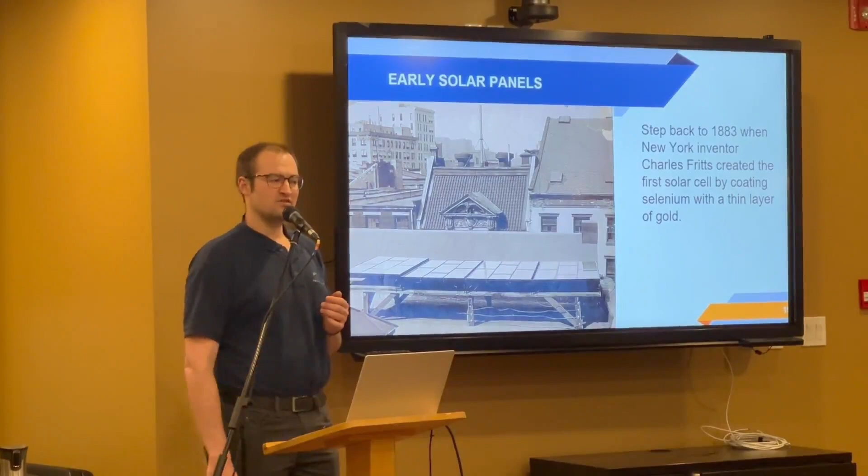After that, there wasn't really a practical application for solar panels on Earth in terms of making the price point make sense. But what really accelerated everything is when we started going to space. Initially, the first crafts that went up would just go up for a short time and then come back down, so you didn't need a way of generating electricity when you were up there - you just had a few batteries on board. But pretty soon, for exploring and satellites and things like that, we realized we need a way to generate electricity in space. The best way to do that was through solar panels.

So the very first solar-powered satellite in space was Vanguard 1, which was launched in 1958.

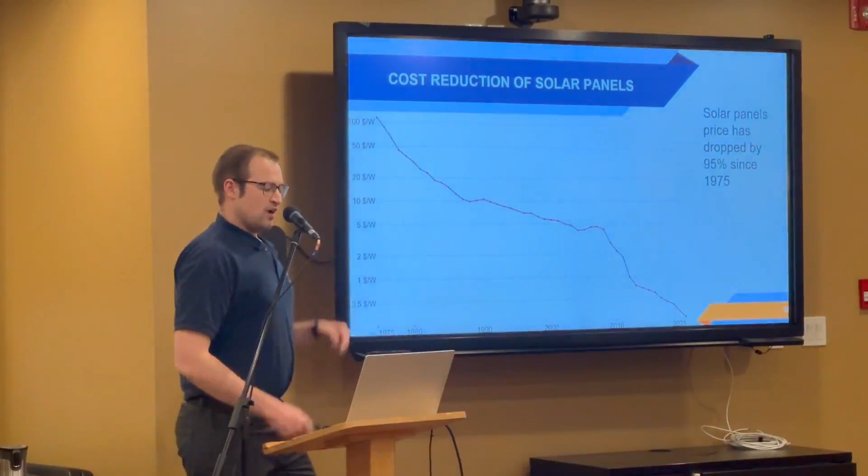So this is a graph that shows the crazy cost reduction in solar panels from 1975 to 2021. Back in 1975, which was when commercially solar was just starting to take off in California and some other places with really large government subsidies, the cost - just for the panel itself, no other gear - was basically $100 per watt for the solar panels. Now fast forward to today, this graph ends in about 2022, but the price has dropped over 95%. Now we're around 25 cents, as opposed to $100. So the reduction has been absolutely staggering.

The nice thing too is with how the global supply of solar panels is looking - that slowed down a little bit, but even now, every year they're getting very slightly cheaper.

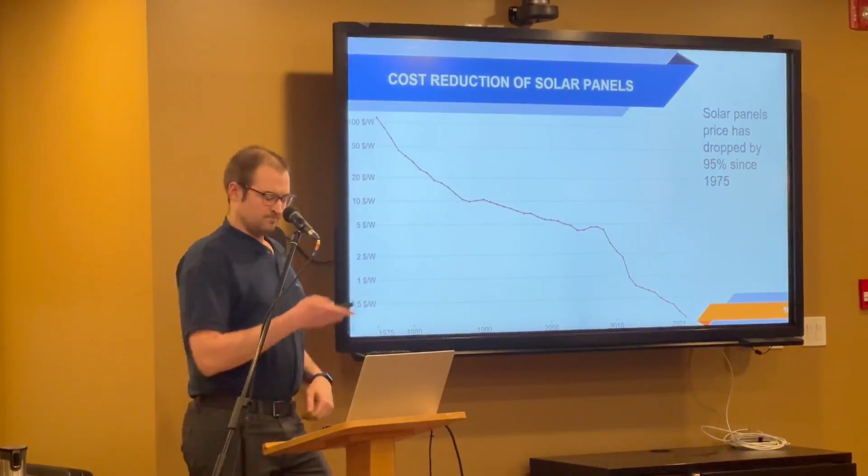So how does a solar panel actually work? What happens is photons come from the sun, and about 20% of them we're able to capture in a solar panel. The two biggest reasons we can't capture more: some photons have either too little energy to be captured by the panel, or too much. The second, even bigger reason is that silicon, which is used in solar panels, is only able to capture part of the light spectrum coming from the sun.

It's more on the blue-green side of the light spectrum as opposed to the red-yellow side. So the next breakthrough in solar panels, which isn't available commercially yet but is being worked on in the lab, is having solar panels made of materials that can capture a bigger range of the light spectrum, increasing efficiency. But it's probably going to be quite a while before we see that.

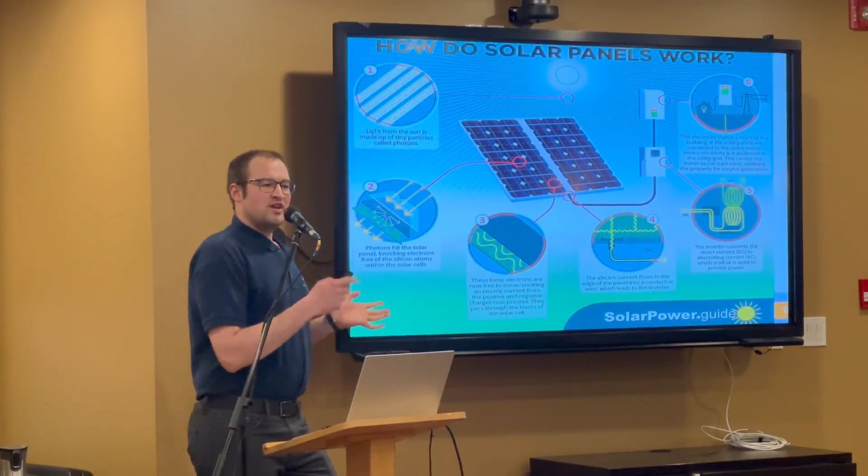After we capture the photons from the sun, the solar panels produce direct current, which is how they're set up. But we don't want direct current, unless it's just a little panel on your RV or to charge your car battery. The rest of the grid in our houses uses alternating current, so we have to have some way of changing that direct current to alternating current, and the way you do that is with an inverter.

When you do a solar system, there are two ways you can do your inverter. One is called a string inverter, where you hook all of your solar panels up together, and you have one big inverter converting all of them from direct current to alternating current. Or you can use a microinverter, where usually each panel, or a group of two panels, has its own little inverter on the roof underneath the solar panels.

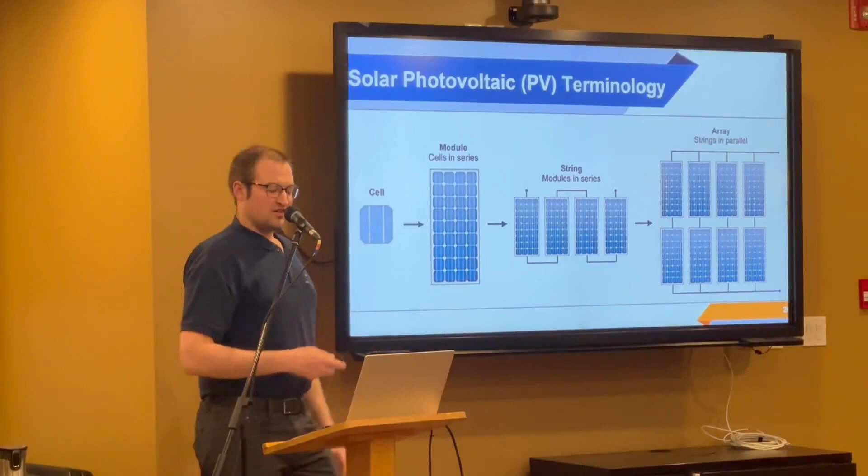In terms of how the systems are constructed, the ones we design we like to think of as off-grid or on-grid. An off-grid system would be for something like a travel trailer or a cabin that's not connected to BC Hydro. In that case, you have a closed system that uses batteries to back up whatever loads you need when the sun isn't shining.

In that system, the solar panel first goes to a charge controller. This is needed because without it, you'll overcharge your batteries if there's more sun than the batteries can take and more than whatever loads you have are using. So it will ramp down how much solar is producing and automatically change how much solar is being fed into the system.

Then from there, you go into an inverter, which changes the direct current to alternating current. So before the inverter, you go into the batteries, which are controlled by the charge controller. Then, depending on if it's sunny or what the usage is, some of it goes into the batteries to be stored, and some is used by the inverter right away to power whatever loads you're using.

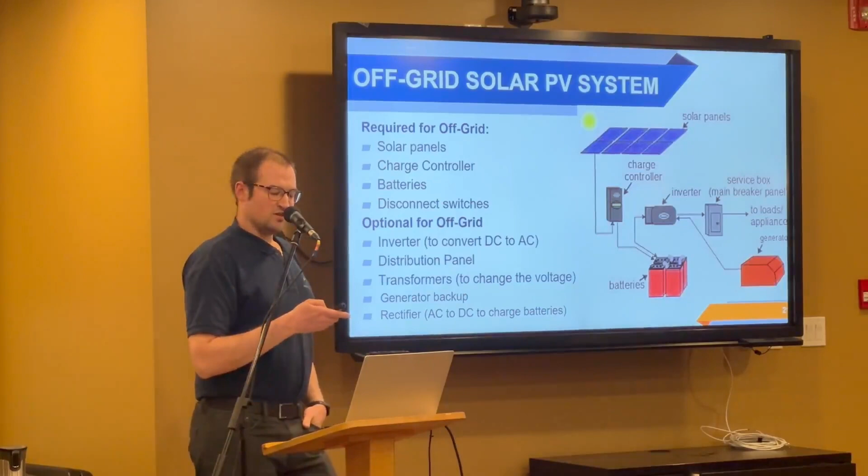The other system, much more common and what most people have for houses here since most of us are on the BC Hydro grid, is a grid-tied system. It's similar, except instead of a charge controller and batteries, you're basically using BC Hydro as your battery. When it's sunnier and you're producing more than you use, you send it back to BC Hydro through your smart meter. You build up an energy credit, and then in the winter, when you're using more than you're producing, you eat back through that energy credit.

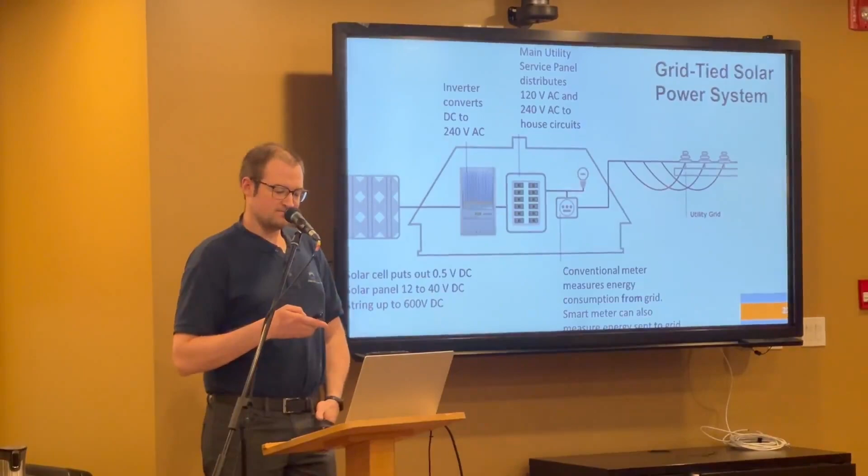So there's a few factors that affect how much solar energy you can produce based on your location. The biggest one is how much shade you have. If you have a lot of trees surrounding your house, it could easily be possible that putting solar on your house doesn't make sense, because you would never be able to pay back the cost of the solar system due to the shading limiting your production.

Another factor is the angle of tilt of the solar panels. People often think, oh, my roof is only 20 degrees, but I want 45 degrees because I want to maximize how much power I generate year round. But here in BC, that's not actually the case unless you're off grid, because what we're trying to do is produce the most amount of solar energy on the longest day of the year. So generally, the roof pitches people have here are fairly close to perfect, or close enough that it doesn't really make a difference.

The other thing is, generally you want to be south-facing, but if you don't have a south-facing roof, you can go east or west-facing, and that's about 12% less efficient on an annual basis than facing due south.

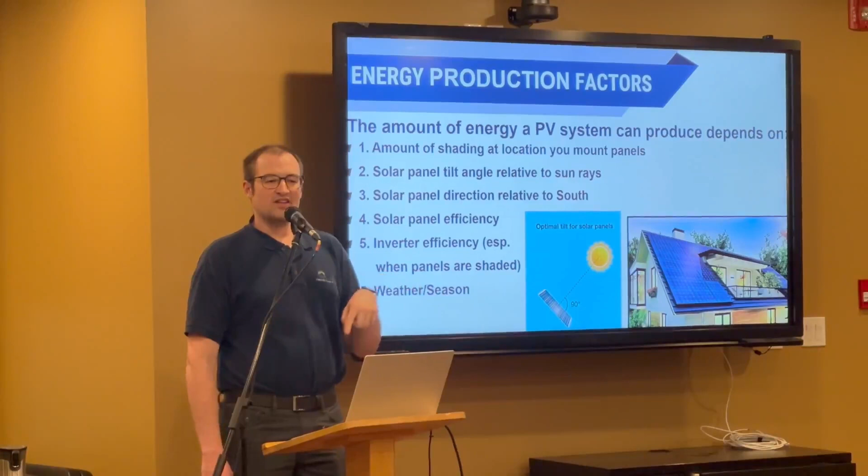The other interesting thing is, it doesn't apply here yet because we don't have enough solar power, but in areas of California, where they've had solar for a lot longer, there are so many people with solar panels facing south that during the day, especially in summer, the grid can't take any more power. So in those locations, if you want to add solar to your house, they'll say you can, but only if you put it east or west facing, producing when not everybody else in your neighborhood is producing.

In terms of how much power, a lot of times even when it's cloudy, you're still producing some solar power. So on a cloudy spring, summer, or fall day, not a short dark winter day, you're producing about a third of what you'd produce on a peak sunny day.

So how much power do you need? In British Columbia, the average house that heats with electricity, like electric baseboard, uses 15,000 kilowatt hours of electricity per year.

You can check how much you're using either by looking at your hydro bill, which shows you in graph form throughout the year, or if you log into your account, you can go in and say, tell me from this date to this date how much power I used, and it'll generate a monthly or bi-monthly report and add it up to show the total amount of kilowatt hours used.

The thing with how our electricity rates in BC work is there are two options for your electrical rates. One is time-of-day billing, where you're charged more during certain times of the day than others. Or you can have it charge you a fixed amount throughout the day. But regardless of which option you choose, we have what's known as stepped electrical rates. You get so much per month at a lower price for electricity, around 10 cents per kilowatt hour. Once you've gone through that amount, they'll bump you up into the expensive electrical price, around 14 cents per kilowatt hour.

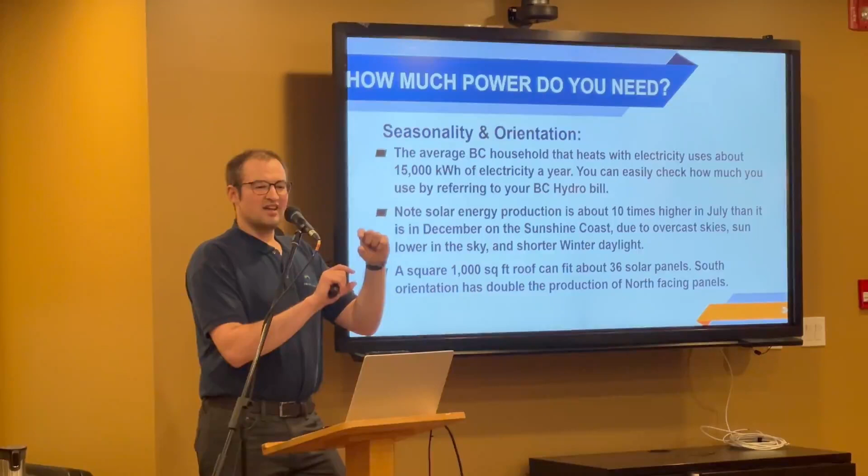So let's say you can generate 70%, and if you improve your building envelope and add a heat pump, you take your electrical bill down by 30%. Well, now instead of being 30% under, you're up to net zero.

All right, any questions?

Do you have to clean solar panels? That's a great question. One of the nice things about solar panels is they have a glass finish that's very slippery, so things don't adhere to it very well. Generally, if you get a good rain, it's enough to clean off the solar panels. Depending on your access, sometimes you notice you got a bunch of needles, leaves, or a branch up there, and it's good to take that off. But generally you don't have to worry about cleaning them.

The other thing is, on a solar panel, there's a little bit of a gap where there's no silicon between the metal frame on the edge and the wafers. So there's a thin layer of algae that likes to grow right where those two join, but they're specifically designed so that doesn't affect production, because that's not an area that has a silicon solar cell.

Is there a particular style of solar panel that works better on roofs? That's a very good question. The biggest difference with solar panels is more from a visual perspective. A lot of people have said, oh, I'd like to get solar, but the fact that it has a silver frame and those blue wafers, a lot of people didn't like that because they thought it was ugly.

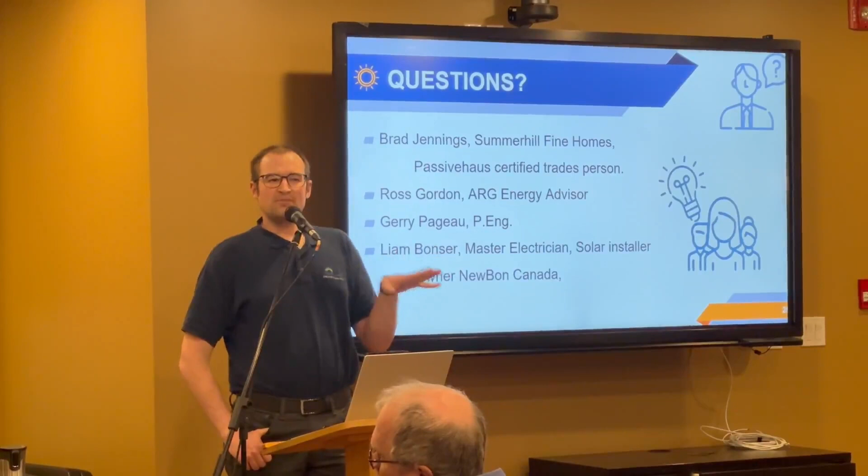Especially now, because in the past solar panels didn't produce a lot of wattage, so you really wanted to squeeze the most out by getting the perfect south-facing angle. Even 7-8 years ago panels were 275 watts; now they're 450 and up, for the same size. Because of that, we're able to put them in places we wouldn't have before, since the wattage is so much higher, the angle being a little off doesn't make as much difference.

I just want to make a comment. Coming next, when we get into the paybacks, I actually have a graph showing what happens if it faces north, south, east, or west, and what happens when you change the angles. So that detail is coming next week. Perfect, thanks Gerry.

I have a big voice. Okay, can you use solar panels as a roof on a deck, or do you need a membrane underneath, or can you use actual panels?

You can definitely use solar panels as a roof, especially covering a deck, because there's a bit of expansion and contraction as they heat up and cool down. You can't use it as a watertight roof for your house, but if you just want to mostly cover your deck, you have options. If a little water seeping through in places doesn't bother you, you could put the panels right on top of the racking, or put a simple membrane underneath to direct water off the panels, using the racking as an awning itself.